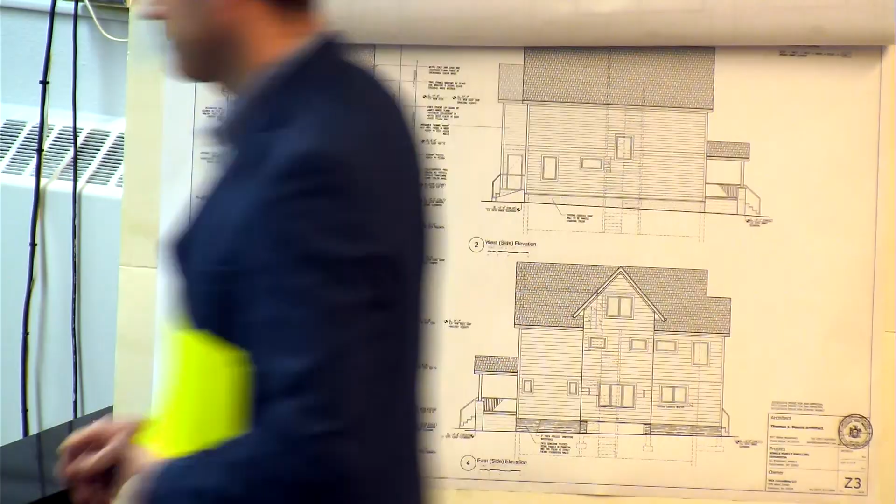I only wrote a couple materials. No, elevations we have. Yes, please. Whatever was the updated submission, which included the more detailed elevation, which specified the materials and colors, plus the materials list. It's just a little bit small on the plan you have, so if you have it for them to look at. Yeah, of course. So this is a small version of the elevations, and these are a few copies of the materials that were emailed. Materials. We also have samples if the board would like to look at specific colors or materials. Okay, let's go through that first, and then we'll look at the samples. Certainly.

As Mr. Sabaj mentioned, this is a vertical expansion of the existing single family. It is a very small building footprint. It's a corner property, so we've encountered some hardship with the front yard setbacks. So the only way to expand that building was really to go up. We proposed a small expansion in the rear as well to pick up some additional square footage, but essentially the footprint of the building remains 90% unchanged. There's an existing roofed front porch. We preserved that aesthetic of the existing dwelling with the steps leading to the front entrance.

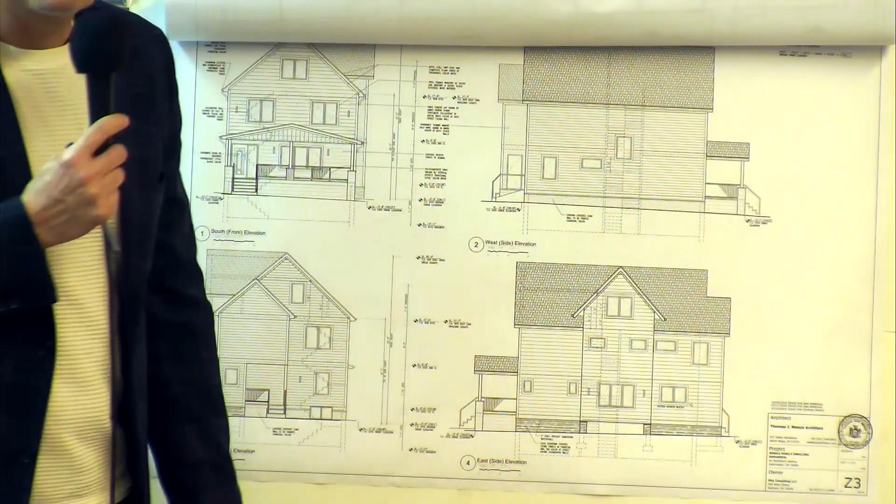That is the elevation facing Brambach. And by adding another floor, we believe that we've given the dwelling a little bit more curb appeal and also more proportional volume that's more consistent with the surrounding neighborhood. The proposed materials are composite siding, and the siding will be in a white or off-white color. The new windows will be black framed. The roof is proposed to be black asphalt shingle, and all of the trim and gutters will be white.

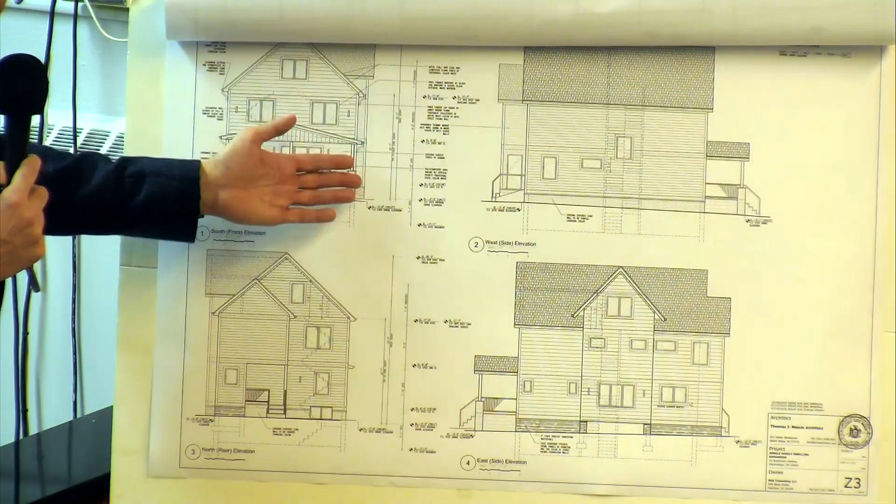There's also some of the building stone base that's exposed with visible foundation wall. So the portions of that foundation wall that are facing both streets, we intend to cover in faux stone that's going to complement the overall finishes of the facade. So are the windows now all new windows? Yes, all of the windows will be replaced and they will be black. Okay, and the existing windows are double hung, is that right? I believe there is a mixture of double hung and casement windows currently. Yes.

And right now, there's no mullions or divided lights? Yes, none of the existing windows seem to have any historic value that we would preserve. So we're proposing to replace all of the windows. Right. Plus they're also older and inefficient from an energy code perspective. Okay. Yes.

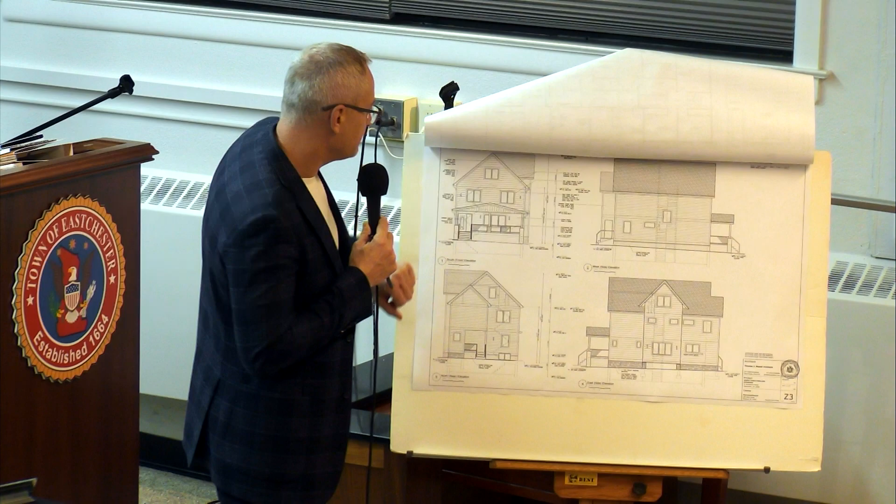Does the height of the home meet code? We are at 32 feet to the ridge from the existing average grade elevation. Which is code, exactly? Yes, code. We are non-conforming to setbacks; we already have the zoning approval for that, and the expansion up meets the code. We've applied to the zoning board of adjustments to approve the variances. But you didn't need a variance for the height of the building? We did not need a variance for height, we needed a variance for the setbacks that were pre-existing. Yes.

Is the home getting a sprinkler system? It will have to be sprinkled because the attic is habitable. And is there a streetscape drawing, or is that required at this, because it's an addition? We don't know. It's suggested for additions, but we don't require renderings for additions of this nature. Okay. Especially when they're going up. There's actually a quite elegant landscape on both sides of the house facing the streets, so we have no intent to significantly change it.

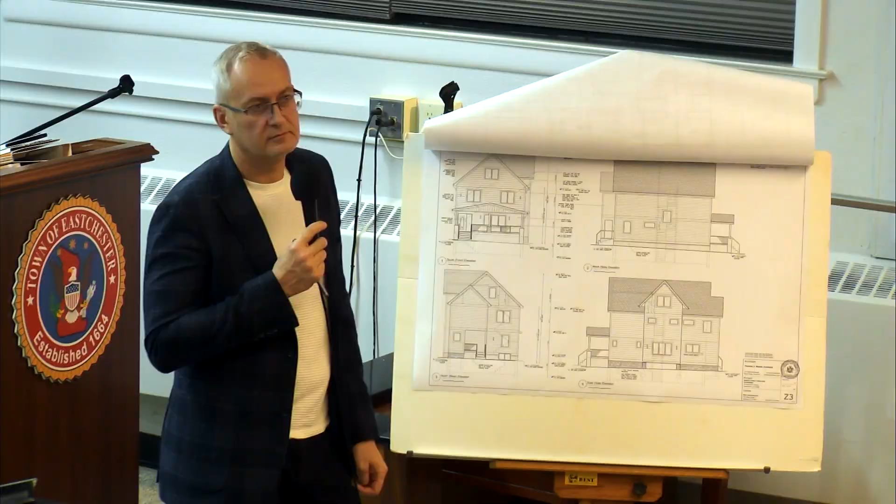What I was speaking about was what we call the streetscape, which places the home with the new dimensions in between the two existing buildings side to side, to see if it pops up or if it's in the same range as the surrounding buildings. To give it scale? Yes, most of the surrounding properties are 2.5 stories. Do you have the photographs of the surrounding properties? Maybe we could take a look at those. We did provide a set of photographs. So which numbers would be to each side?

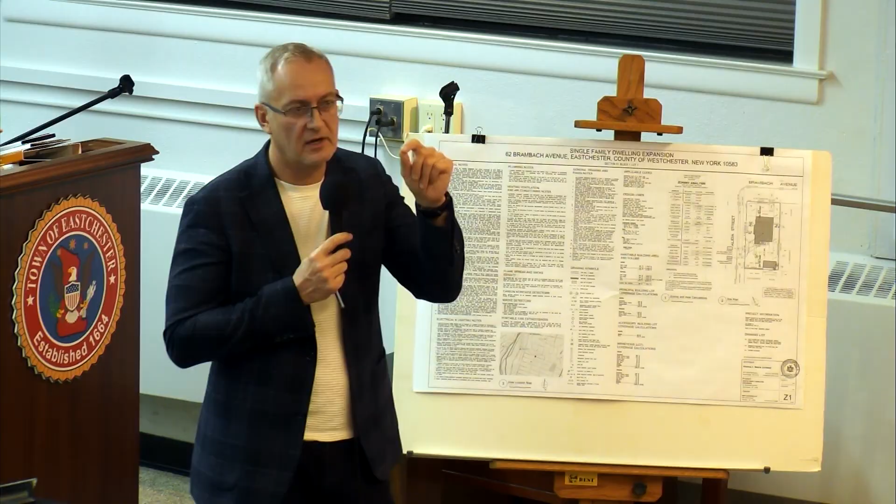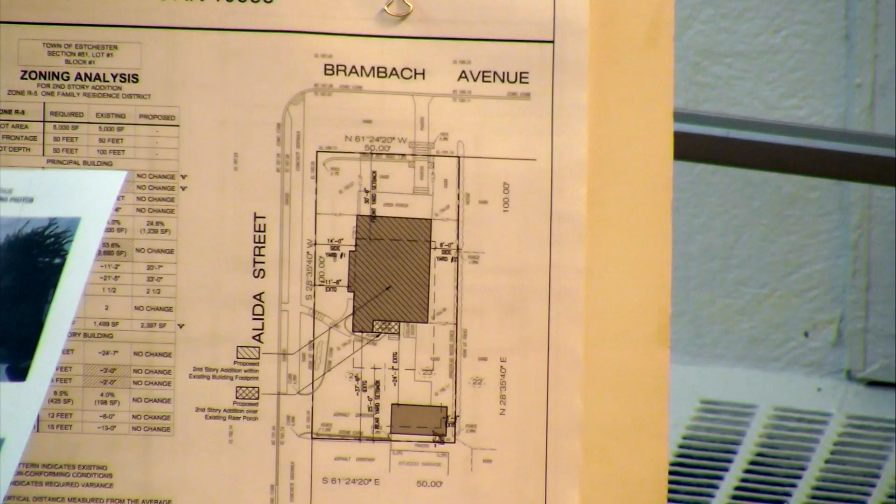They're labeled by address numbers. Yes, I think there is a key plan, the map attached, and each of the houses that we photographed is labeled according to the location plan. Do you want to maybe put them up on the board? Okay. So the immediate vicinity along Brambach Avenue, facing the house from the front, to our left are two residences. There's 66 Brambach Avenue. If you put that onto the easel, then we can project it onto the screen with the camera. Yes, certainly.

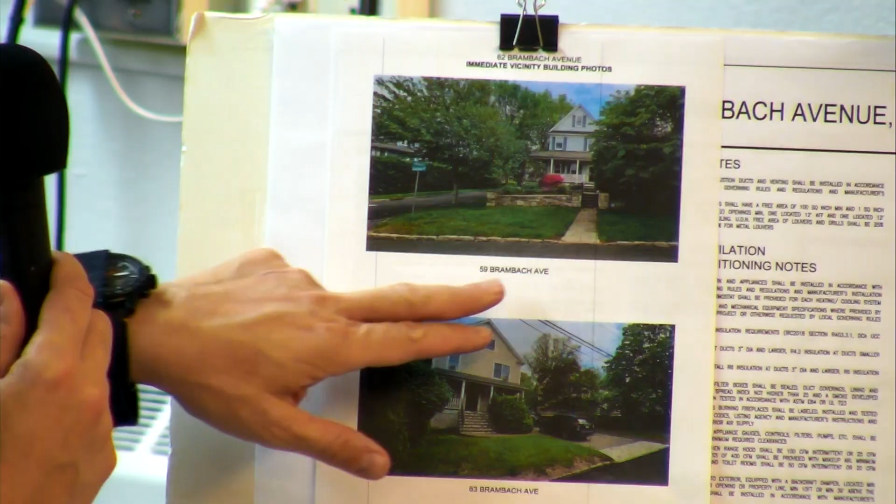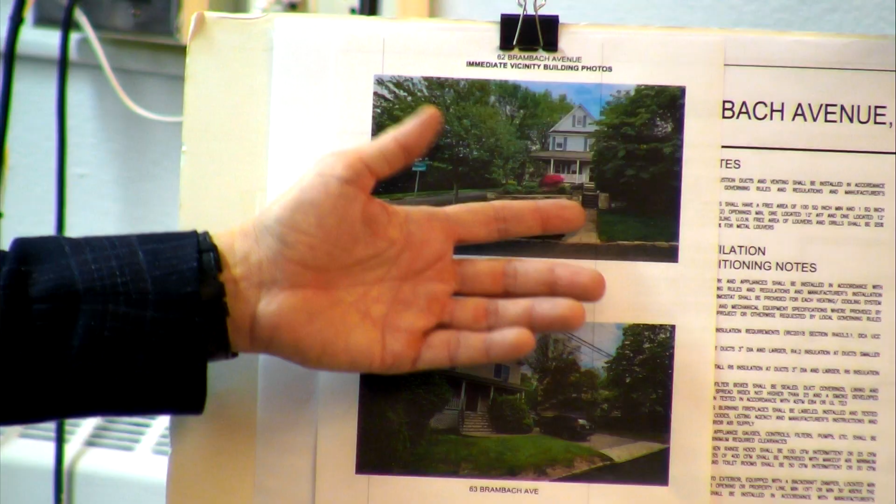Our property is here on the corner, and the two adjacent houses are 66 and 70 Brambach Avenue, and those are both 2.5-story structures. So this is the immediate vicinity. All the other buildings are either behind or across the street from us, and generally all the houses are 2 and 2.5 stories. The buildings located across the street are these two. Directly across the street on the other side of Brambach Avenue is 59. That's also a corner property. It's a 2.5-story, which is very closely matching what we're proposing: front steps, high first floor, 2 stories, and habitable attic.

Immediately adjacent to it is 63 Brambach Avenue with a very similar setup: the high first floor accessible via a set of steps, a roofed front porch, second floor, and habitable attic. So there's a strong synergy between the buildings in the immediate vicinity. Okay. 63 is the most similar in scale, right? Probably both; 59 and 63 are similar in scale. 59 is narrow, so even though it looks tall, it's not as tall. But 63 is a wider home. It has double windows in the attic, so scale-wise, it's similar to that house. Gotcha.

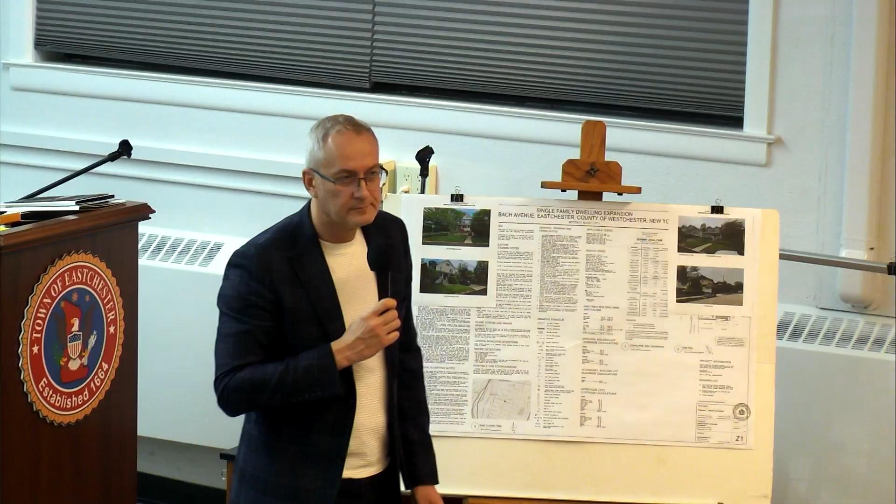And the street in general, from 70 to 66 to yours, which is 62? Does the street go flat, go down, go up? Do you know? It goes up towards Edward Street. Yes, Brambach goes up towards Edwards. And I think Alida goes slightly down towards Lee Avenue. But there are no significant differences in elevations within half of the block, I would say. So then it goes down towards Alida in front of yours? Yes, that is correct. Okay. So that kind of helps in terms of how the height appears more than anything else.

Okay. It's visibly the lowest house in the whole neighborhood, being the 1-story. Right, so I mean, now it is. At the present time. It'll be the tallest house? I think it'll be the tallest house now. No, I think it's...

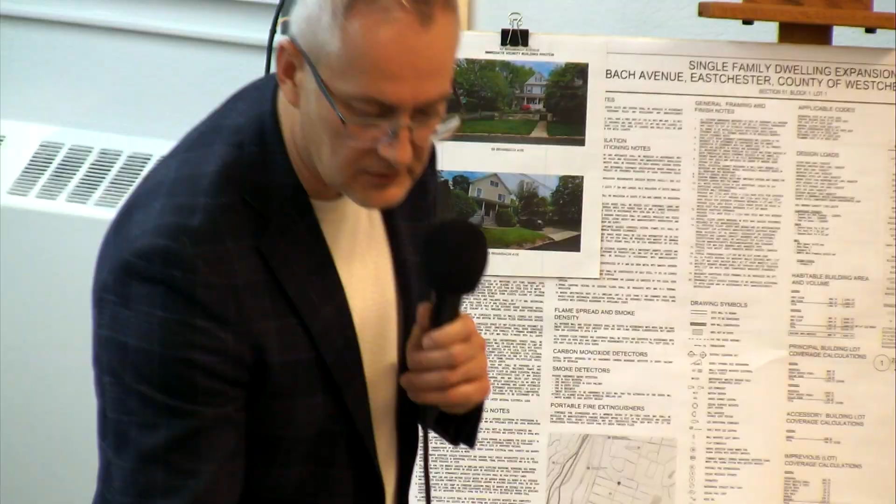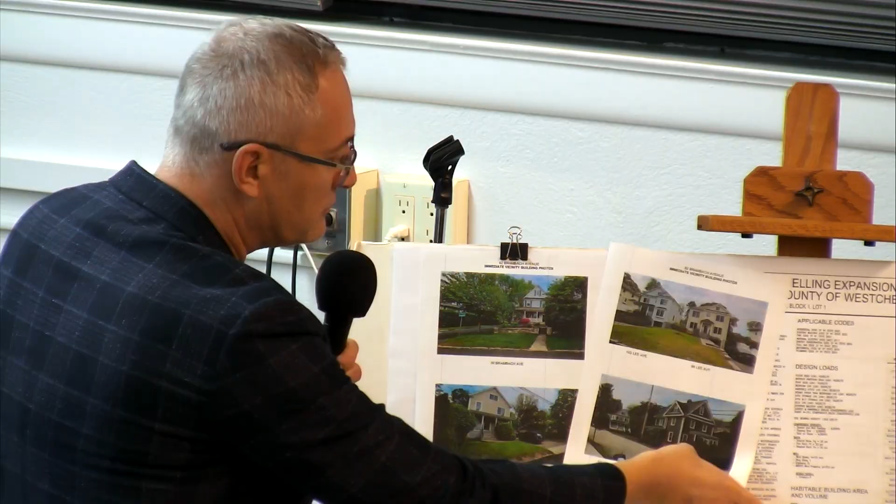So they're very similar. And then there's 2 new residences built on Lee Avenue, actually, I have it on the same page. Those are 98 and 102 Lee Avenue. They're also 2.5 stories, high first floor, habitable attic, and they also have sort of perception of a 4th lowest level, which is an exposed basement with a garage. So I think we're sort of within the middle range between the lower houses and the higher houses within the vicinity of the block.

So, on to the samples of the materials. So we're proposing a dark roof. Do you want to bring that up to the board? Yes, please. Certainly. Just pass that. Okay. Our basis of design is the black one marked in the middle of the page, by GAF Roofing.

The house exterior will be white or off-white. Here's the vinyl siding sample, the very first one in the corner. And for the composite siding, we don't have the exact color, but we have this for materiality. It's going to be in white color as well. And where will the composite be? The composite is facing the streets.

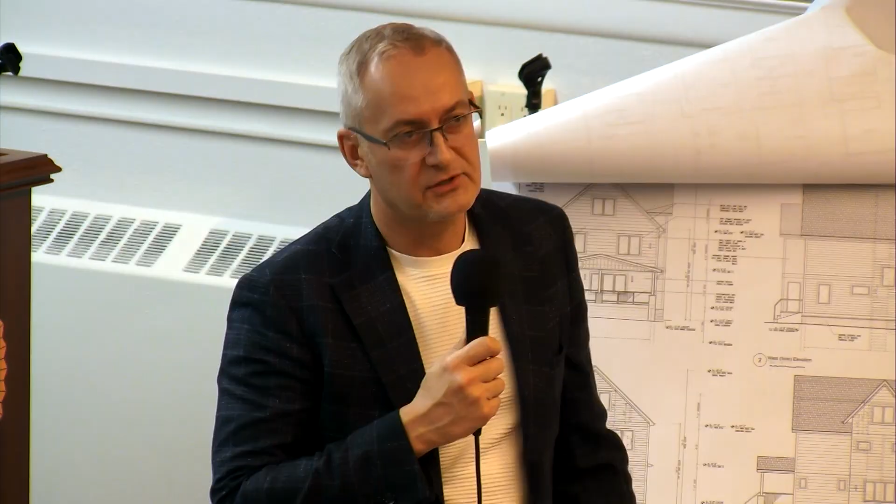So you're gonna miter the 2 different corners? There's gonna be a composite corner that's gonna separate the 2 materials. Like a PVC corner that the Hardie plank dies to, and the vinyl on the opposite side will probably have a J-bead, like a channel to accept the vinyl against the PVC. Okay. I think we're gonna use a Hardie corner at the termination of the Hardie plank, and then transition to vinyl, instead of using a vinyl corner.

Okay, so on the vinyl side, it's just gonna go up to the Hardie corner with no... Oh, there has to be a channel. So there's going to be a vertical Hardie corner, and on one side there's going to be a Hardie plank coming to it. On the other side, vinyl siding. Okay.

Do you know how much the difference would be? What's the difference between doing the whole house in Hardie and doing half and half? It costs like double. More than double, yeah. The cost of Hardie is more than double the cost of installation of vinyl siding. But being that you're doing half already, it would be more like 3/4.

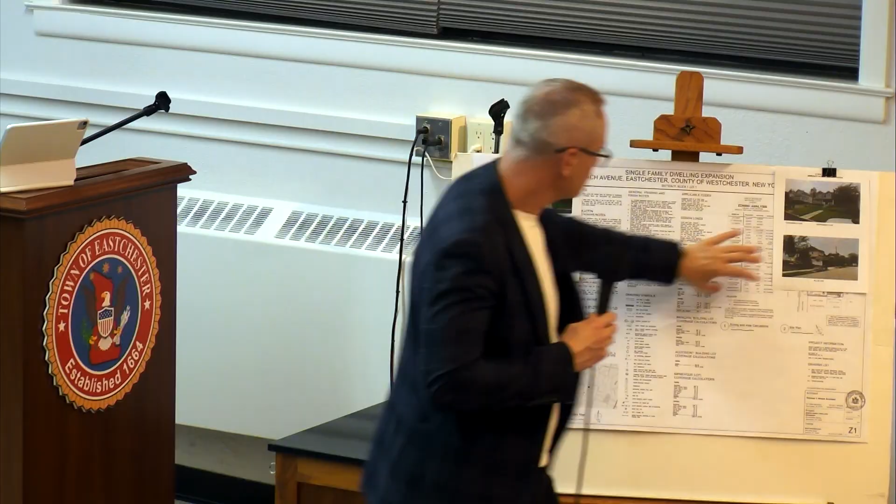I'm just afraid it's gonna be really noticeable. What do you think? That side of the house is so close to the property line that really nobody can see it. And besides the exposure, the colors are very, very similar. The color is going to be white for both materials. Yeah, cement board's Arctic white.

So the east side elevation, that also gets horizontal, everything's horizontal now. Even though that's Hardie plank, you're not doing anything in that center piece, that bump out. Facing east? That's the other corner, right? Yes, that's the one facing Alida Street. Okay. And those triple windows at the center of that elevation, are they the same windows that are in the photographs, or is that a whole new thing?

They're the same as far as the location, but there is an existing bay window which we're removing. It's inefficient, outdated, and it doesn't really serve any practical purpose. So we're coming back with a window that's co-planar with the building elevation. Not a bay window. Not a bay window, no. Is that the one that has the diamond mullions right now?

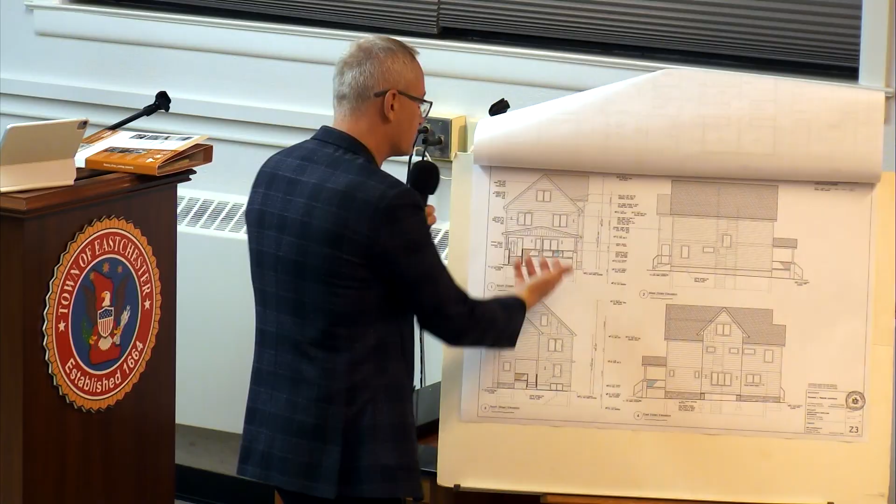And the triple window that's on the front elevation is on the porch area, that's not a bay, it's just a flat triple window, right? Yes, it's within the porch, under the roof. Yes, it's a flat window. Also co-planar with the building facade.

Do you think there could be anything like, even though they're casement windows, some sort of a division in the middle, like just 1/1? It would make it less modern in a sense, if you think about doing a divided light on the casements. They're all casements because of egress. All the new windows are casements. The windows need to meet egress requirements, driven by bedroom requirements. So consistently, we continue the same size and style of windows across the other sides.

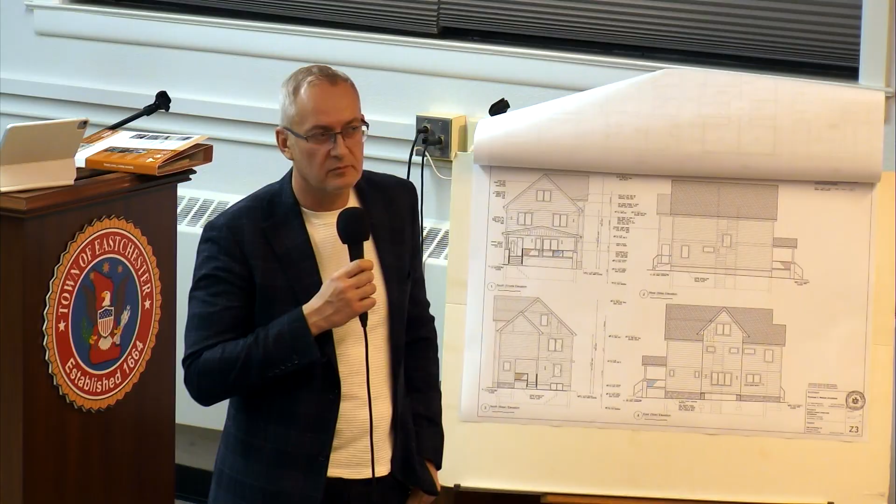Did you ever think about doing a divided light, like a fixed vertical? I mean, it's owner's choice. Most of those homes over there have windows with some divided lights. A little bit more traditional, 1920s, 30s look, right? And I don't think this home is super modern, requiring just a single pane. It certainly would be a doable thing, an option to introduce some divided lights. As long as they're all matching. It will not contradict what we're trying to achieve aesthetically.

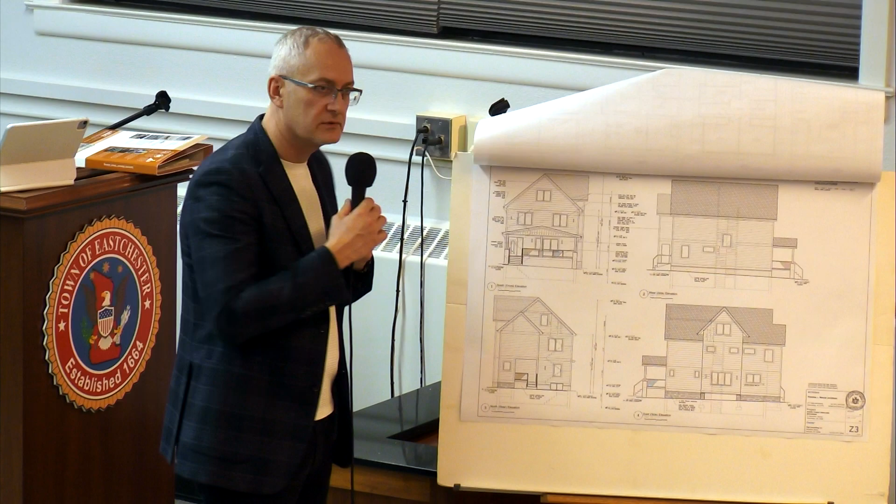Are you replacing that front porch at all, or the stairs? The front porch is staying, we're just replacing and improving all of the finishes, the siding, to the corresponding materials that we're using elsewhere. Steps are in original location, the posts as well, the railing gets replaced. There's actually a massive knee wall serving as a railing, so we're removing that knee wall, leaving just piers at the columns, and we're introducing a handrail.

Is that what you needed the variance for? No, we needed the variance for front yard setbacks for the vertical expansion. We didn't need a variance for the porch because we're not changing its size or dimensions. And the railing material? It's going to be a white polycomposite vinyl railing.

So open up to public hearing at this point.

I'd like to make a motion to open a public hearing on application 25-44, 62 Brombach Avenue. Second? All in favor? Aye. Is there anyone here from the neighborhood who would like to make a comment regarding this or have any questions about this application? No? Any more questions or comments from the board members?

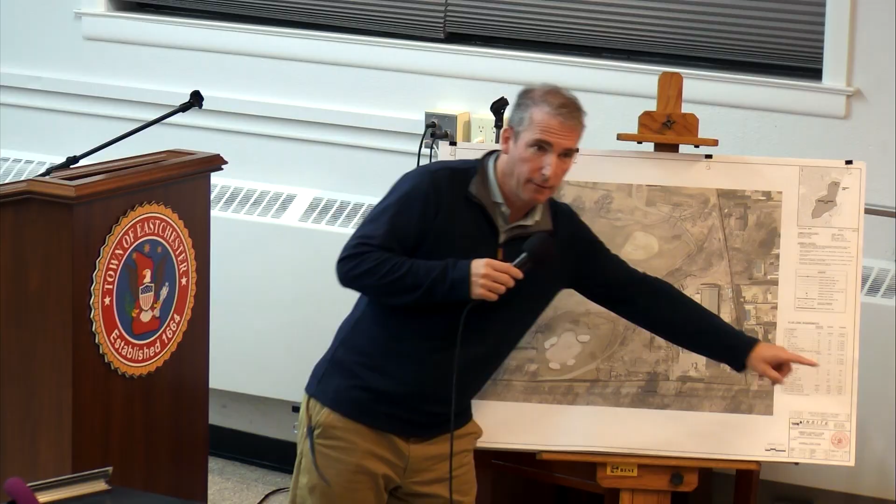There are some residences which are on the next street over. They back up to the facility. Okay, so there's nothing that's across. The facility itself is downhill from California Road and thoroughly planted out with existing material along California Road, except for where the driveway enters into the property. There's a minimal view of the buildings. There's also a minimal view of the buildings from the golf course, and there's a restricted view from the homeowners.

There's existing plantings that occur along the property line. There's some new plantings proposed along the property line. There's actually one neighbor that prefers not to have plantings because they want more light in their backyard, so they don't have plantings. It was very specific with meeting with the neighbors to make sure that everyone was happy.

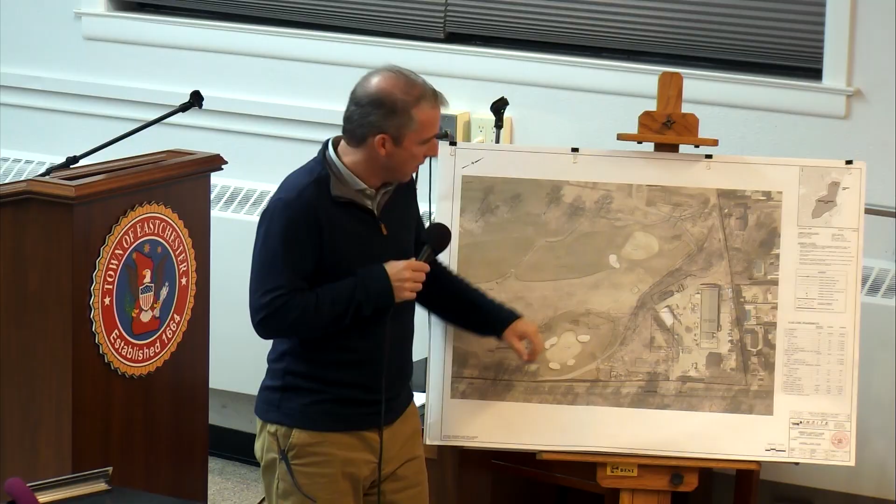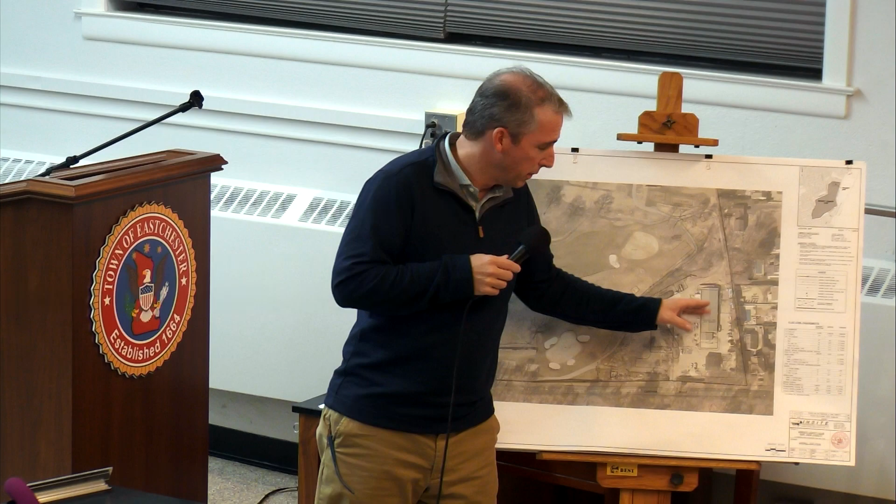So in the existing here, you see here's an existing building. This is the existing ridge that we'll talk about that has the height that we're matching with the other structures. And we're putting an addition onto this structure here. And then you'll see on the next one, there's a new structure and then one that's over here. The existing building has a metal roof and it has vertical metal siding, and it's in a green color. We're not looking to change from that.

And I can show you some images of the existing building. So this building exists, except it has a smaller, lower portion of it on the front, and we're going to extend that and then put in these two. You can see a number of additional plantings that have been added. When you drive along California Road, you can't see in. These are just supplemental plantings to add in. And there's some that's over here, and then there's a noticeable spot where there isn't some. That's a neighbor that would prefer not to have plantings in that location.

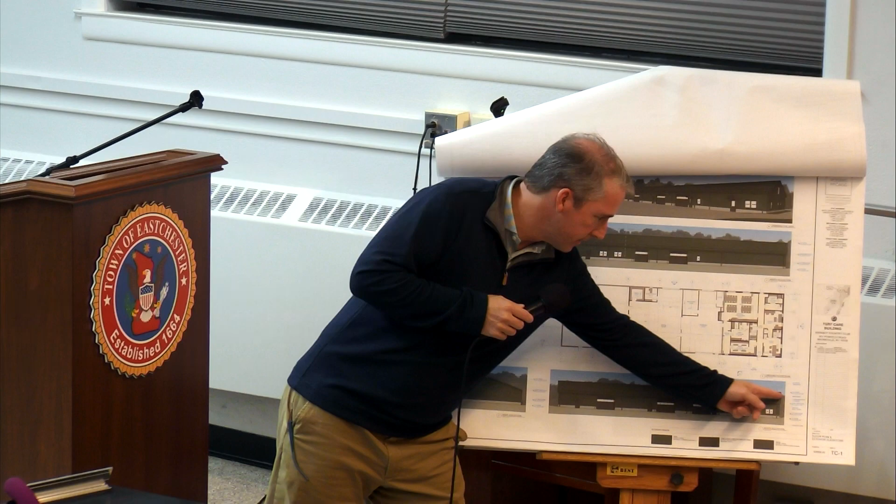The elevations that you see here, there's a white line right here. This is the existing building, and it's a green vertical metal siding with a green roof. And that is the only portion that we're looking to add. It's an addition because we're doing the full width, but there's a portion of the building that is there now. The reason for that is because we're trying to put some more bathrooms and offices for the turf care staff, so it's for the staff that maintains the golf course. Most of it is for storage of equipment, repair of equipment.

You'll see in another building that we're doing, it's an environmental center. It has a recycle wash system in it. The overhead doors and the man doors are in a medium gray. And so there's the building there. The existing has a pitched roof. No change from that. It's trying to make it look as residential as we can, although it's a commercial structure. So this is the storage barn. It has similar garage doors on it, the same vertical metal siding.

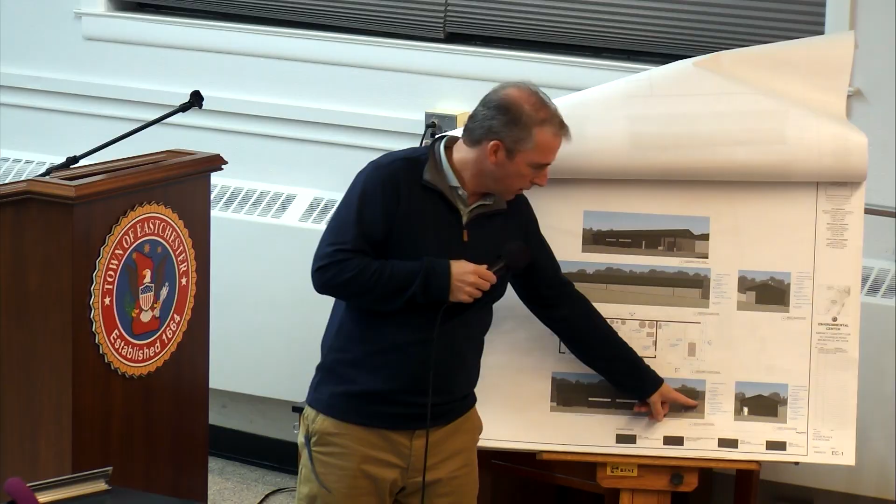This structure is a little bit different. It has a covered wash pad area. This is the one that gets a little bit more technical. This whole pad over here, you pull the tractor onto it, you hose it off, it collects all that water and clippings, and it recycles it. It's a very large pool filtration system, but it's carbon-based so that it can take the washing of the equipment as it comes off, and other stuff that's stored inside there.

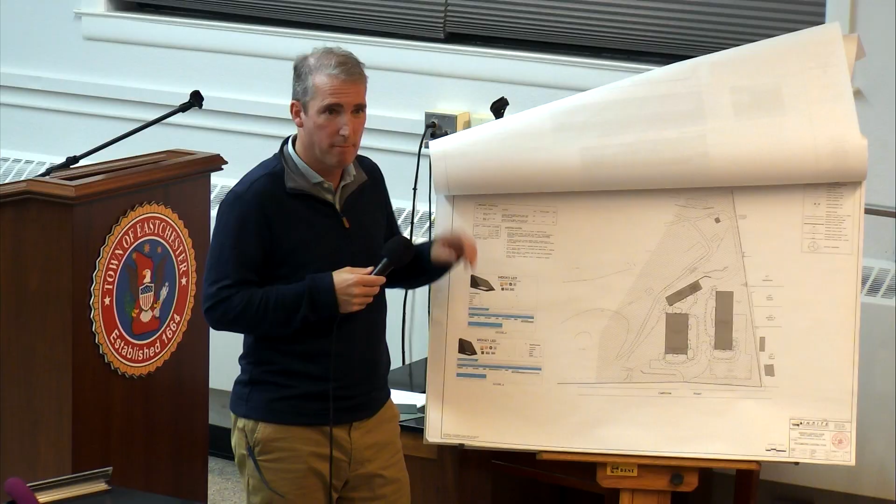You have a photometric study that's in the drawings. We have full cutoff light fixtures, and so they're dark sky compliant. There's no lights on the neighbor side of the building, except we're required to have a light at every man door. It's an emergency light. The neighbors won't see it. The focus of the lighting is in the courtyard area there, as you can see from the calculations that are done on that drawing. That's a run through.

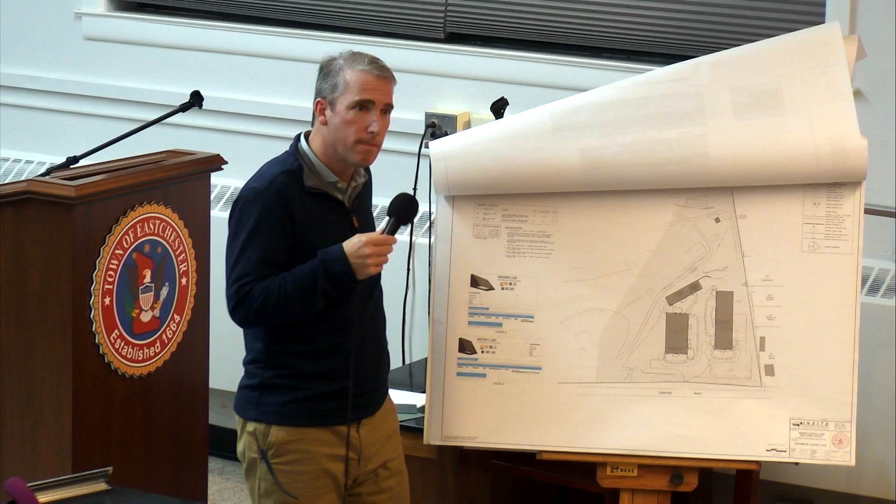Could you just, right there, one building of those three is existing and the two more are new, additional? Yes. Okay. In the presentation to the planning board, the applicant explained they're basically taking a lot of the maintenance activities they do outdoors and bringing them into these buildings. And they're all gonna match. They all match. Yep.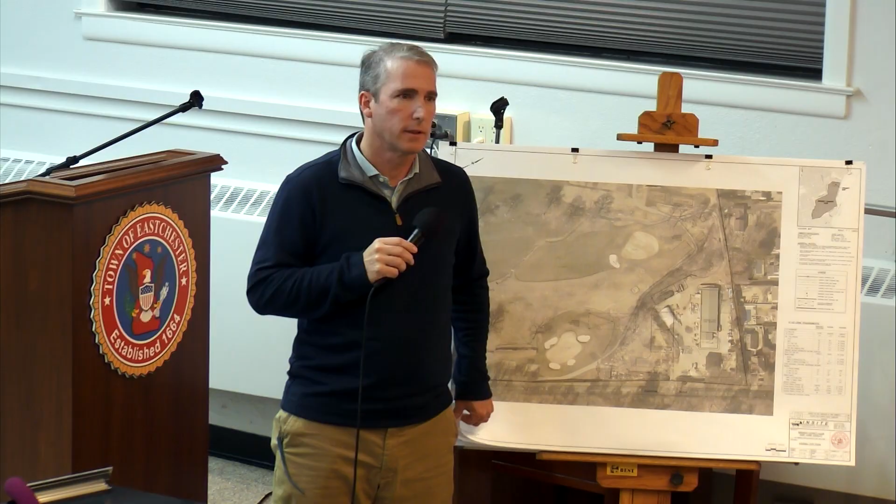And this, in the turf care building, this is all employee business: lockers, lunchrooms. Right now that area is very small. There's a toilet, and the toilet has a janitor's closet in it, and there are 26 staff in that area, so it was a little bit tight before. And a lunchroom.

That's pretty. That's nice. And

I started off just mentioning how we had to go for the variance for the height. It's only 20 feet tall. It's just that it's different rules than the residential, but it's 20 feet. They granted you the variances? Yes. We just have to go back to planning board to complete the process. But planning board really had no comments for us.

They were very favorable. What was the highest? The height, yeah. 20 feet was the highest, okay. It's a one-story building. No, it mentioned it's 26 feet, pitched, that was proposed. Would we want to have a flat roof to have it be lower? No, I agree. The 26 feet is the ridge of the storage barn. The storage barn to the eave is 14.5 feet.

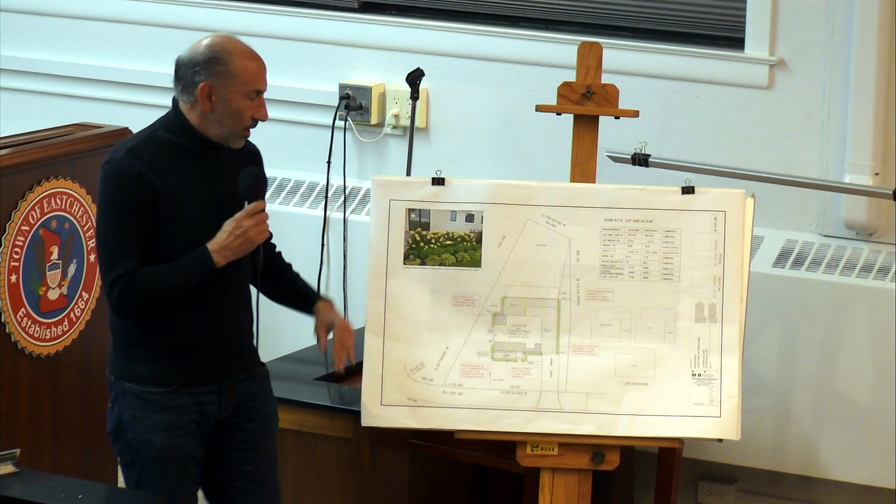And the zoning board granted several variances, including a side yard setback, the proposed longer front porch than is permitted, and a side yard setback as well for the second-story addition. Currently, it's a 1.5-story home. The intent is to have a full squared-off two-story home. The existing first floor will remain. It's 8-foot ceiling heights. That will remain, and then the second floor will be developed in full.

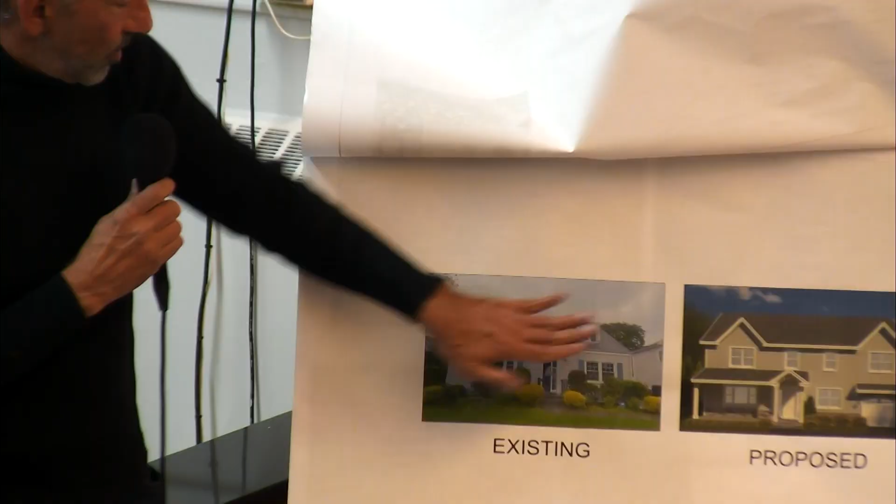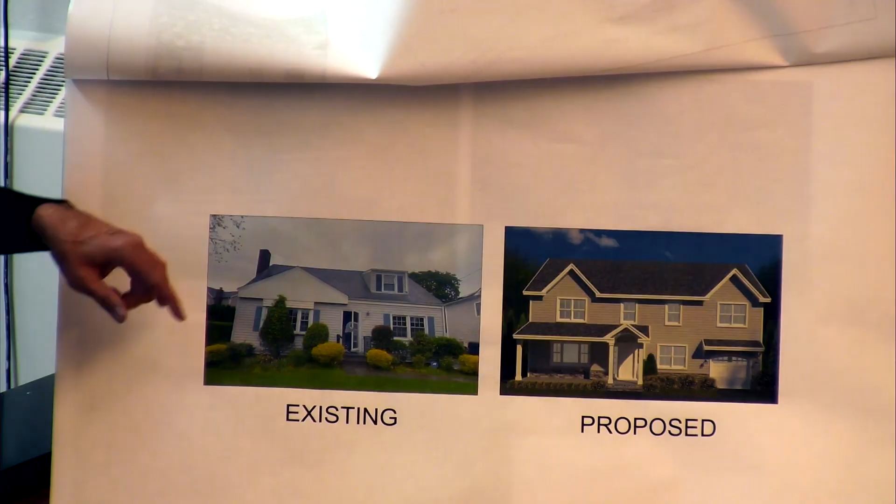You can see the existing home here compared to the proposed rendering. So the second floor will come off. All the windows will be changed, all the siding will be changed, new roof shingles. All the windows will be 2/2, simulated divided light, white grille. The siding is a Hardie shake-style siding with a 5-inch exposure. You can see here the proposed front porch and the front door. The garage currently is kind of around the corner, set back. We're pushing that forward so the garage aligns with the front facade.

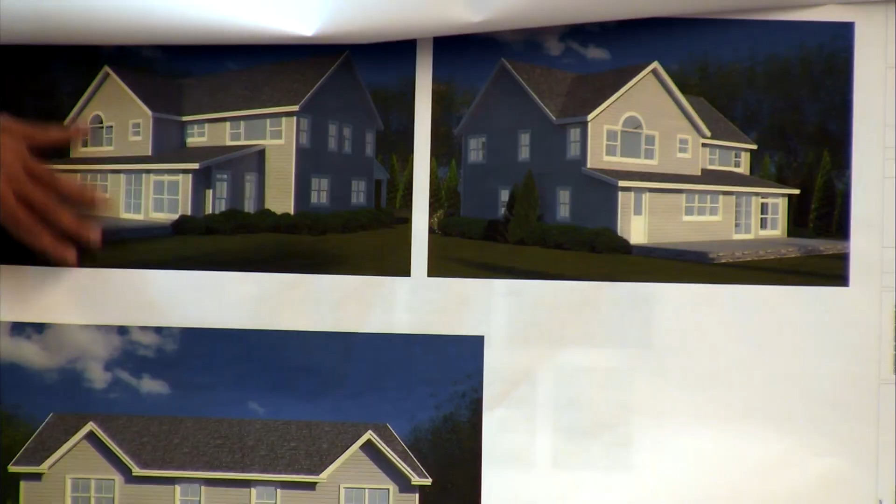You can see here some views from the rear and the sides, and the asphalt shingles for the roof, and all the siding; all the trim work will be an AZEK white board. We've also added 2 lantern-style sconce fixtures at the garage door. Let me just...

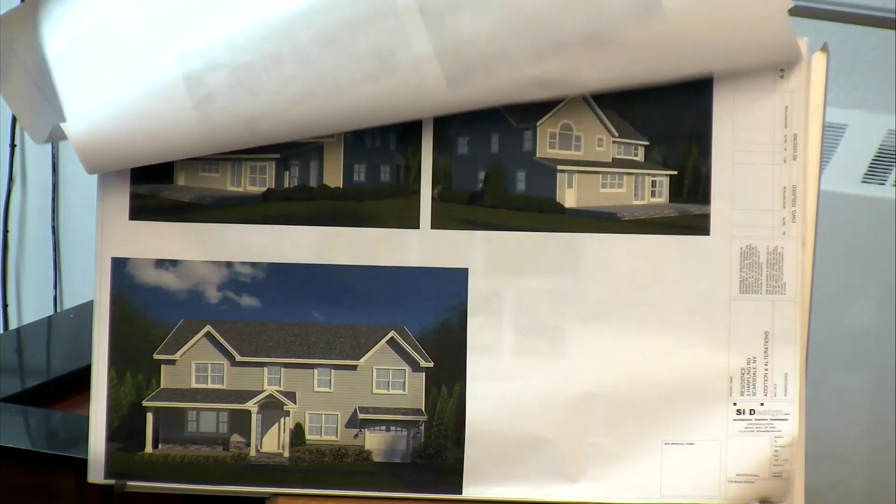These are photos of the existing home. You can see there's a shed dormer in the back, a low attic, a small dormer in the front. The whole entire roof will come off. These are some neighboring homes. Hanfling is relatively flat, and all the homes here are all 2 stories.

I believe the home number 5 did a recent project years ago. They're actually taller. One of the things we clarified was the height. We are 17'11" or 18 feet to the principal eave, which is below the maximum requirement.

And here is our color and material board. You can see here the windows, the roof shingles, the siding, and we're doing a stone skirt in the front of the house. And then we have the 6x6 columns, which will be wrapped with the AZEK trim, AZEK board, and then the sconce fixture, which will be by the garage door.

Okay. A moment ago, you mentioned the height being 17 something? Just to the principal eave, that was one of the clarifications that we had to put on the elevation drawing. Yeah, we have 2 height measurements, the first to the principal eave, and then to the ridge, which is permitted 33 feet. Right, and this is 29'10" to the ridge, I believe. Yeah. It's less than 18 feet to the principal eave.

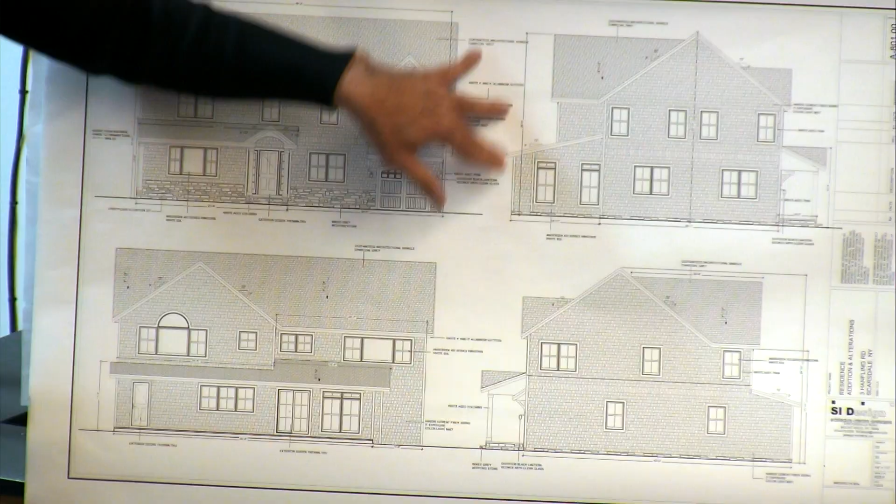And then previously, you mentioned that the first floor will stay at 8 feet, and then the second floor is also 8? Yes. Oh, okay. Did they mark the materials? Not on the elevations that you have, but we did receive updated elevations. Okay. Yeah, the only thing we added was that dimension to show that it's zoning compliant in terms of height. Right, and an indication of the materials. Yeah, that was all the indication of the materials, yes.

And do you have samples of the material? Well, you had a picture there that I don't think we have. You might have that on a separate sheet in the application packet. That was what initially was submitted. These are better than the actual samples, just in terms of... Oh, okay, here we go. Yeah. Thank you.

And the mixed gray Bedford stone appears on the front? The stone is only on the front, and the gray mist siding is the entire house. What's the material for the siding? It's a cement fiber board, a Hardie, but it's like a shake style, yeah.

Did you ever think about, I think the front elevation reads too flat, one-dimensional. Did you ever think about the two gables you have in the front? If you project those, the second floor elevation just slightly out, where the gables are. You mean like cantilever it forward? Yeah, just like under the gables, where the two windows are, like this. Oh, like that. And also, if you ever considered doing a hip roof. We did not consider doing a hip roof. The owner, the client, liked the gables the way they are in the front.

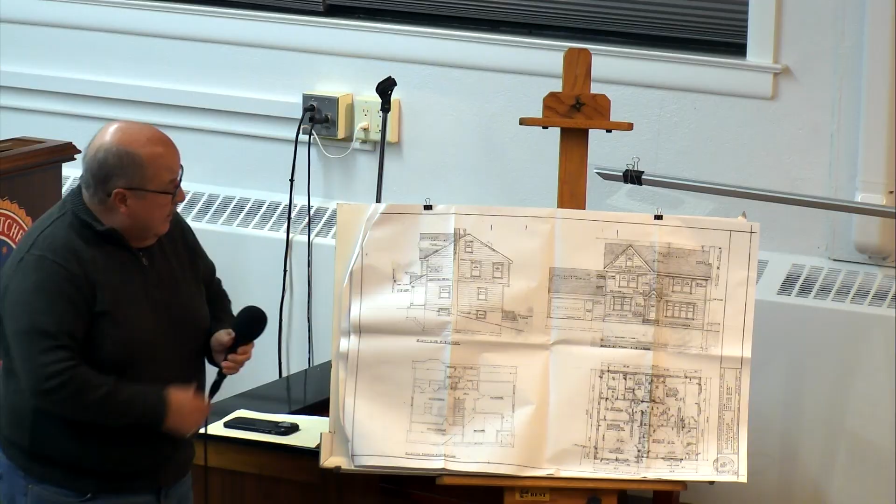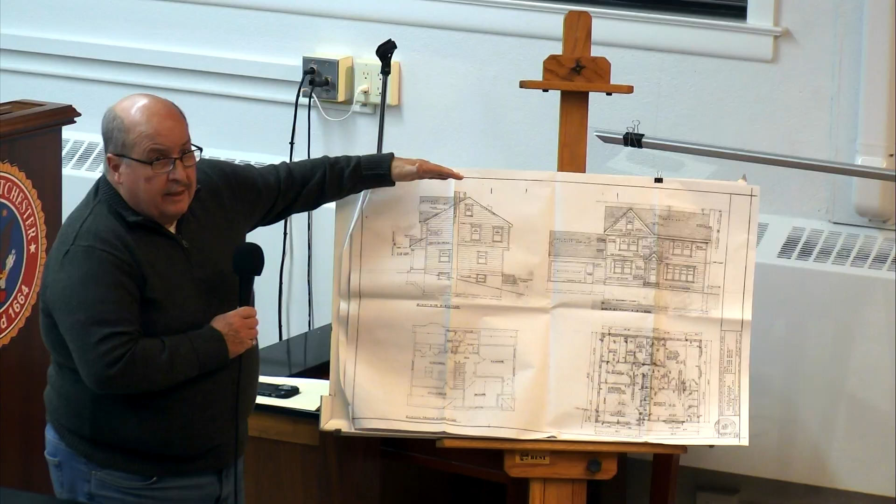Good evening. My name's John Caro. I'm representing Mr. Hanna tonight. Just hold it closer to your mouth. Apologize. So we're basically going to be expanding the house vertically. Right now, it's a gable roof over the existing house. And there's a small dormer on the front of the building, which has a room, if you will, in it. It doesn't really have adequate ceiling height, which is one of the reasons that they've decided to expand the building vertically.

So we're going to have basically 4 bedrooms, 3 bedrooms upstairs, and 2 baths. The building will be about 17 feet to the eaves and another 8 feet to the top of the roof. We have to also extend the chimney vertically. We're adding a new covered porch on the front of the house. The windows on the bottom of the house are going to remain, and there are no muntin bars in the windows. And we're going to continue that look in the top, so we're going to keep all double hungs

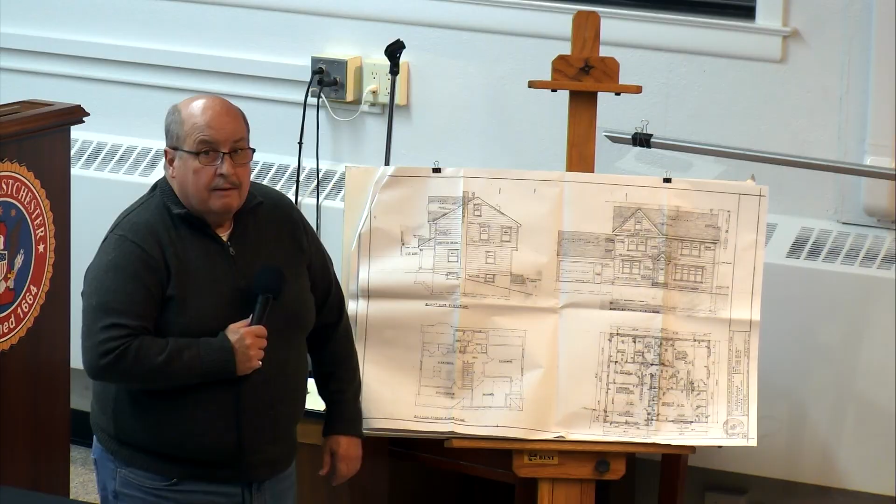with no muntin bars. The building will probably be all resided with Hardie board. All the trim will be AZEK. They haven't picked a color for the siding yet, but the siding and the roofing will probably be a dark color, but I don't know what it will be yet. Do you have a palette that you're considering that maybe we could discuss? Yes. Some samples?

Yeah, we just have samples of some sidings that might be used on the house. It's not really a palette picked yet, except for these colors. Would you like to see them? Yes, please. So are you using Hardie board? Yeah, it's going to be all Hardie board siding on the outside. It'll be a clapboard style siding. All the exterior trim's gonna be what? AZEK, white? White.

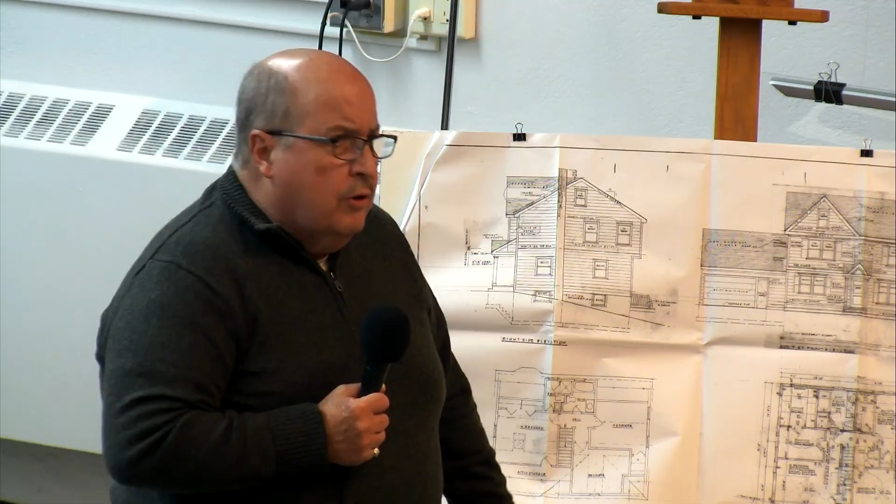What about the roof? Roof will probably be... The Hardie plank, are you gonna go textured or smooth? I'm sorry? Textured or smooth with the Hardie plank? Texture. Textured?

And what about the windows? Are they all new windows? The windows on the lower part of the house are all going to remain. We're going to basically match those windows. Those windows were recently replaced, and the new windows on the top of the building will be similar windows. What type of windows are existing? Vinyl replacements? Andersen? Oh, Andersen's? Yeah. Everything will be... and the existing window colors.

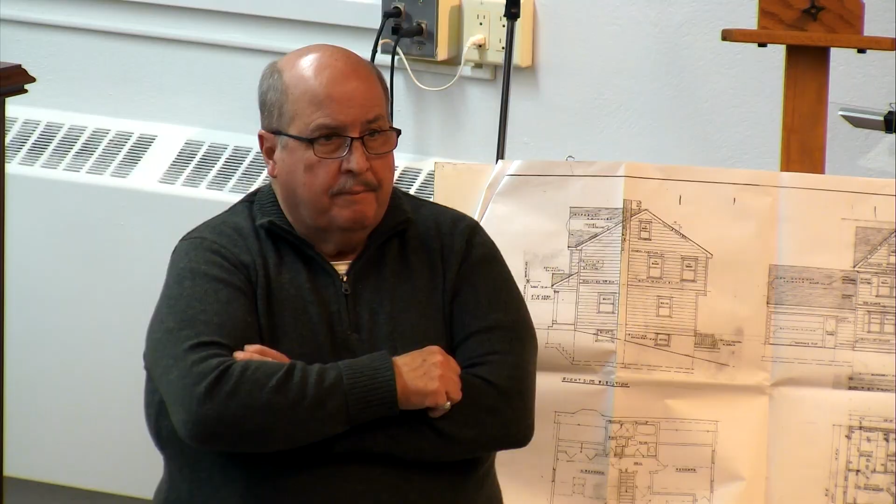And then can you pass me down the samples? I could write down the colors, the ones you would like to recommend. Okay. So we prefer the top two. Top 2, okay. Generally, we prefer the lighter since you're going dark with the roof. Okay, but present the roof color when you come in. And then the window color is white? Is that what's existing? Okay. And the trim will be white as well? Okay, so just present that in a package to the planning board when you beef it up.

Okay? So why don't I read through the recommendations to the planning board? Okay. And then we could proceed with a motion. So it would be, the applicant is proposing white Andersen 400 series windows. Please provide a cut sheet for the windows with the planning board submission. Please specify the color of the siding. The Architectural Review Board recommends a lighter color siding such as the aged pewter or Boothbay blue. Number 3, please update the drawings, oh, no, sorry, that's the same.

Please show the location of new HVAC equipment on the site plan. Please indicate that the chimney will be extended using the same materials as existing. And please label the white AZEK trim on the elevation. Also shutters, color of shutters. They were proposing shutters, but we don't know the color. Okay. I mean, when they present, right? Because they were gonna do. Sure. Make sure that that's. Sure. So 7 would be to add the color of the proposed shutters to the elevation.

So I'd like to make a motion to refer application 25-53 located at 4 End Place to the planning board with those previously mentioned recommendations. I second. All in favor? Aye. Aye. Very good. Thank you. And our next application this evening is application 25-71 located at 10 Sage Place.

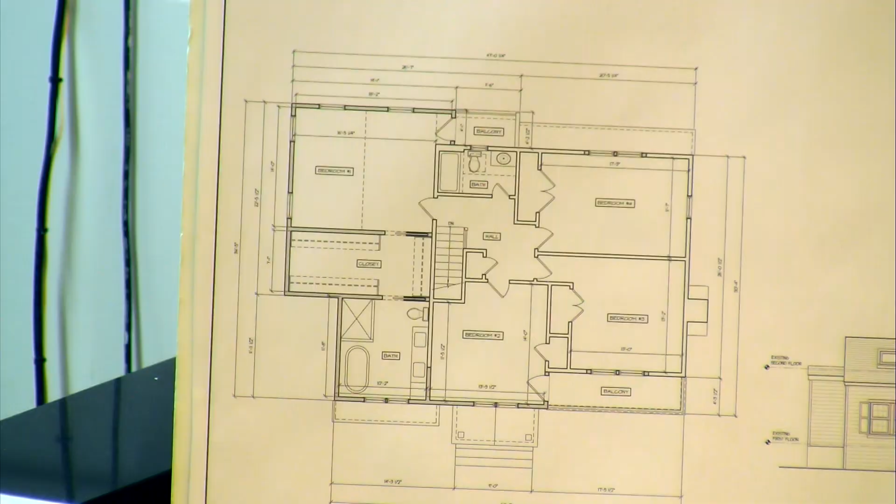And then here is the proposed front, showing the second-story addition, the two-story addition further back, one-story addition at the front with a balcony, which is accessible from the second floor, and the new portico. And then on the sides, this side of the house, really, you only see the addition beyond.

And then this is the rear, the two-story addition here, which is currently a one-story addition that we're just adding onto the second floor. And same thing on the side. The side is existing at one story, we're just adding the second story there also.

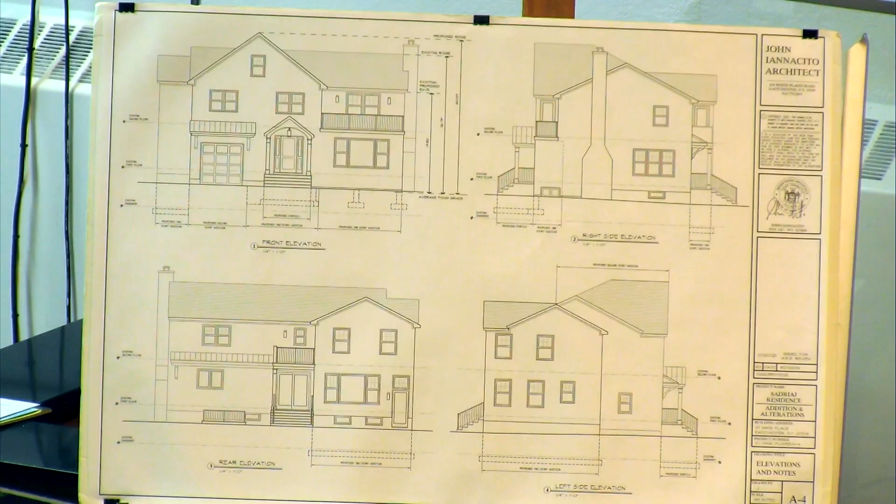The windows will be Andersen 400 series, vinyl clad in a black finish. The trim boards around the windows will be AZEK with the black finish. The trim boards at the roof line, including the eave, the soffit, and the rake boards, will all be AZEK in a black finish. The trim at the portico, including the rake and the columns, will all be AZEK in a white finish. The trim at the roof structure over the garage doors will also be AZEK in a white finish.

The railing at the balcony, we have a balcony here and one at the rear, is going to be a metal railing in a black finish. The front entrance door and the overhead door will be a fiberglass door with black finish also. And then we're proposing a couple of light fixtures. We have one at the portico here, a hanging fixture, and two fixtures at the upper balcony on either side of that window.

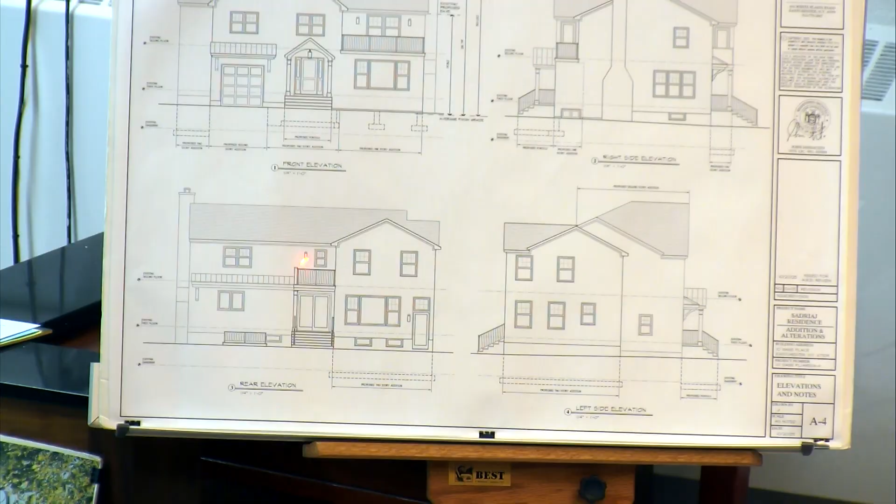And then we also have a couple at the rear, one at this entrance here, and one at the upper balcony above the rear entrance. And then we also have some recessed lighting underneath this roof here. Thank you for your time, and I'm happy to answer any questions.

The base color is white, is it white? The stucco's white, yeah, there might be a little bit of shade in it. Winter white? Yeah, kind of. There's a lot of variations on white these days. Used to be one white, now there's 600 whites. And the texture to it, is that? Yeah, the texture of the stucco.

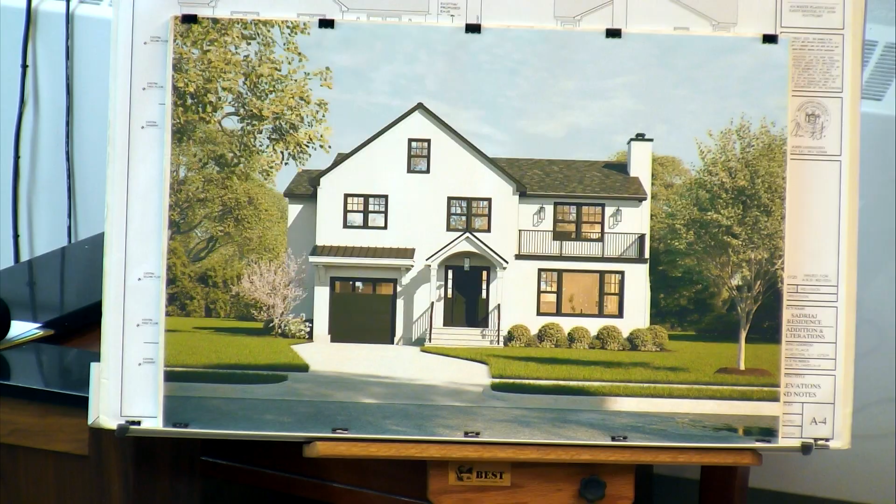This is a gray finish, but this is the stucco. Okay. And then the roof shingles is charcoal. Okay. This is the overhead doors. There's the metal railing. AZEK. And the standing seam metal roof. So basically black and white everywhere.

The AZEK's textured? Oh, no, it'll be smooth. Yeah, smooth. The black AZEK, are they gonna paint it? You know, you can paint it. Sorry, would you mind using the microphone? Thanks. You can paint the AZEK, but there is a material that comes solid black, so we'll probably go with that one. I think it's called Boral.

You said they're doing stucco all the way around? Stucco all around, yep, including the chimney. The chimney's currently brick, so we'll stucco the chimney. What is the siding now? It's vinyl. Okay.

So, I'm not finding the exact garage door here, like the windows, is it? Well, that's the company, so I think there's one that might have more divided squares on it than what's shown there. Okay, well, most of them in a single garage have like two transoms, and this one has three. Yeah, we're gonna do the one with three. They'll do it? I think so.

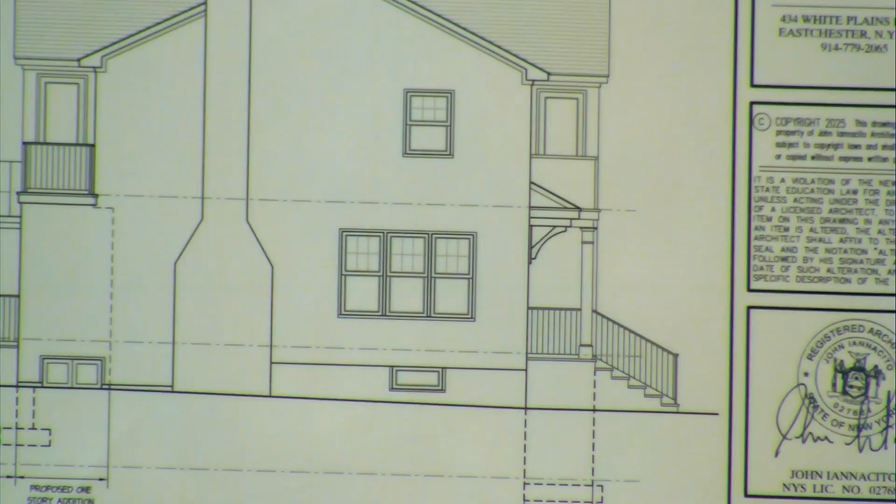And then, I know that it's the planning board's purview regarding the HVAC, but are you upgrading? Are you still keeping it in the same place? Yeah, so currently it's in the corner here behind the chimney. And there's also some pool equipment here. So yeah, we're gonna keep it in the same location.

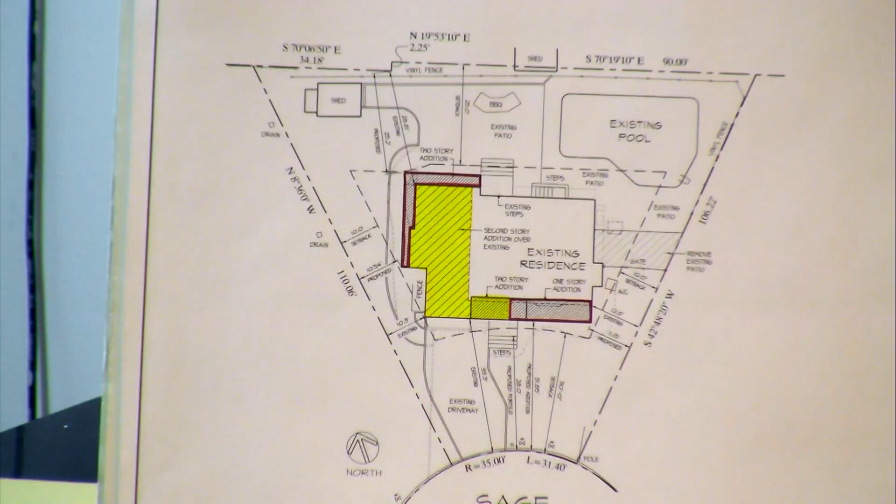They probably will replace it. I think they wanna go into a heat pump system instead of the conventional AC, but it'll still require a unit outside. Okay, so just make sure that it's on the site plan. Yep. Any other comments or questions?

Okay. I'd like to make a motion to open the public hearing for application 25-71 at 10 Sage Place. I second. All in favor? Aye. Anyone here from the audience like to question or comment regarding this application? I guess not. I'd like to make a motion to close the public hearing on application 25-71 at 10 Sage Place. I second. All in favor? Aye.

And then I'd like to make a motion to refer application 25-71, located at 10 Sage Place, to the planning board with a recommendation to approve as submitted. Second? All righty, all in favor? Aye. Thank you very much. Thank you.

And as always, appreciated those nice renderings, John. Okay. You got the rail? The railing is good. Thank you. Have a great holiday. You too. Thank you, you too.

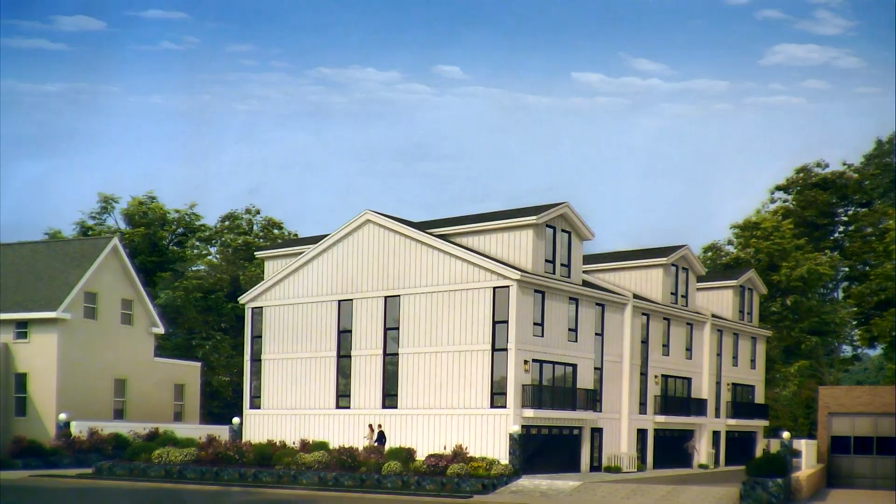We were referred to your board by the planning board at their last meeting. And with that, I think I provided a brief overview of the project and where we stand in the process, and I'm going to turn it over to Mr. Agavino and Mr. Freda to go through some of the specific design concepts that they're proposing for your consideration.

How you doing? My name is Angelo Agavino. I'm the owner of the project, hopefully the developer. Thank you for taking the time out to take a look at the drawings this evening. What we're proposing here is a 6-family, 3-bedroom unit.

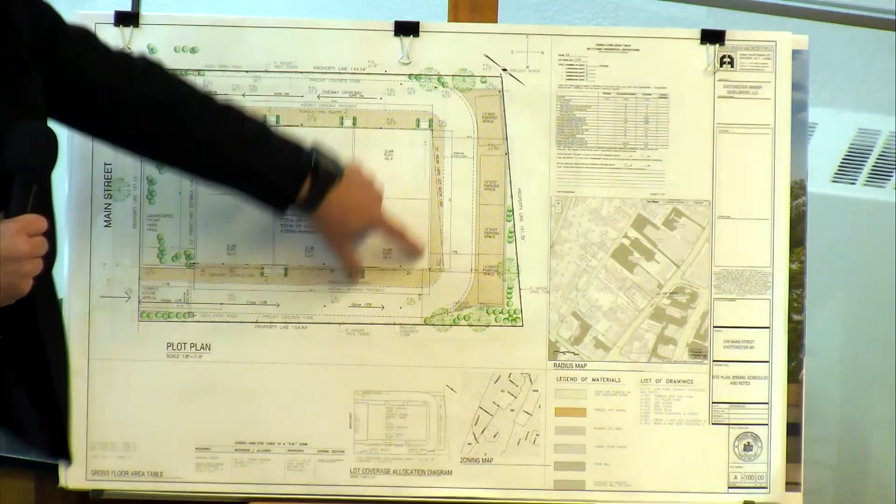We did a flow-through driveway that starts on the north side, goes around the building, and comes out on the south side. We have a mix between blacktop and pavers. You'll see the hatch; these are pavers. Here's the air conditioning units by the front of each of the dwelling units. This one has 2 next to each other.

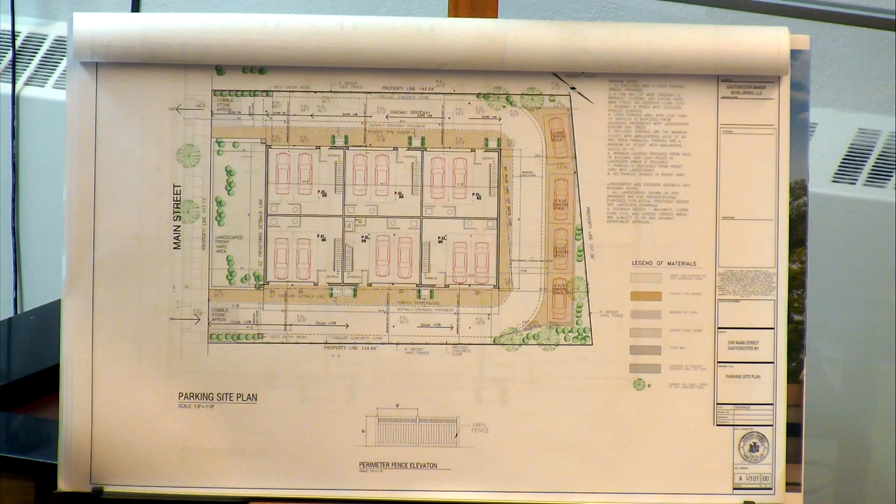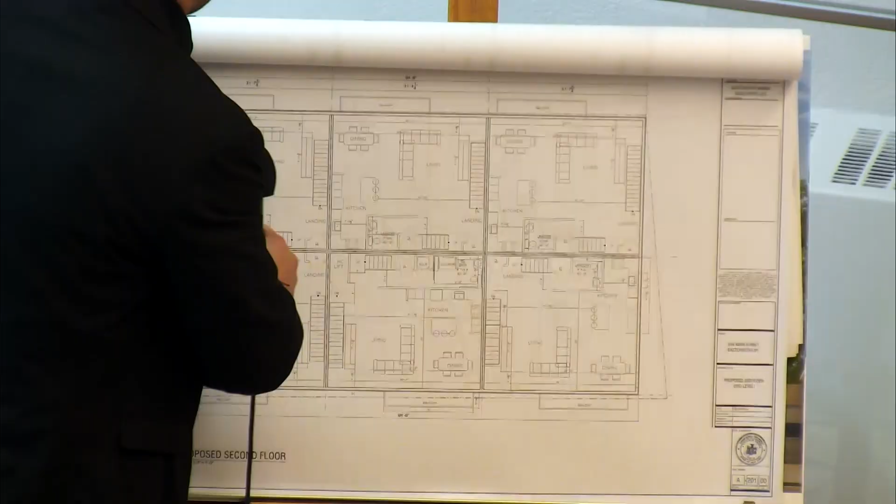Each apartment has two indoor parking spots on the first floor and basement area. And then we have some additional parking here in the back. We designed basically an open floor plan. So the first floor coming up into the kitchen, living room, family room, dining area is all open. Then we have 3 bedrooms upstairs. There's a master bathroom and then a shared bathroom in the hallway.

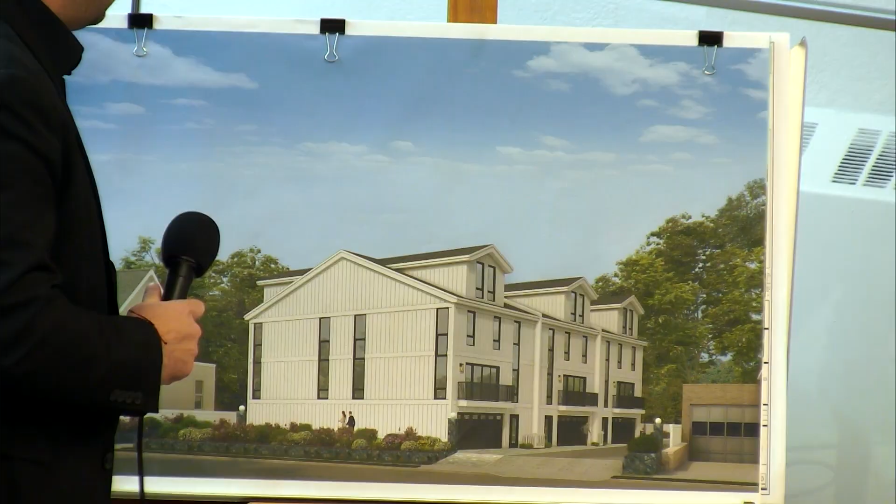We're going to do the board and batten style from Hardie. The sheets come 12 by 4, and it's all cement board, and the batten pieces are also cement; they come every 2 feet. So the sheet goes up first, and then these battens go up to get the three-dimensional farmhouse look. The trim is going to be AZEK, and it's going to be white.

The windows are going to be 400 series Andersen windows, black. We're going to go with a black garage door and black front door. Each apartment has a small balcony and a Juliet balcony to come out with double sliding doors. They open left to right, one's left, one's right. I don't know if the board has any questions that I could help answer.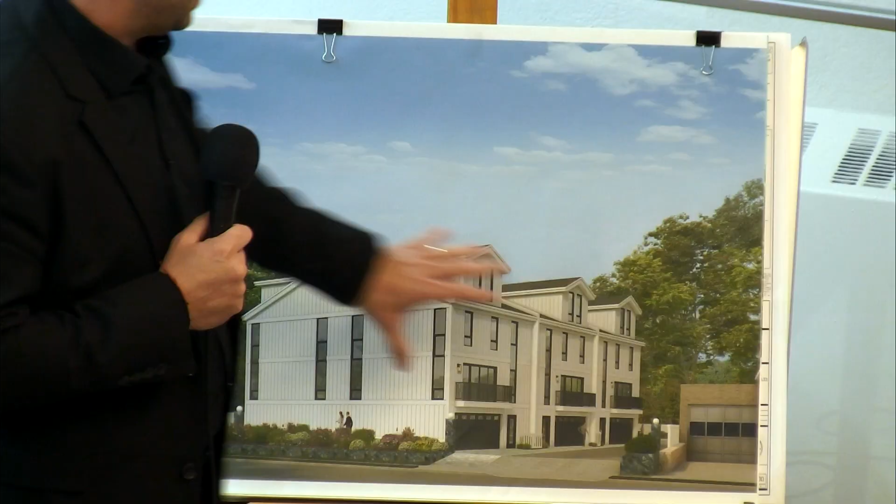The garage that I see to the right of that, is that part of the firehouse? No, this is the firehouse here. This is the three-dimensional shot, because I wanted to get more of the angle; this is part of the firehouse. Okay, so I'm not seeing it in this picture, it's probably over there on that picture? Yeah, it's actually to the left of that, the white door. I guess it cut off in that.

All right, and then 243 Main Street, the yellow home, is that the one to the other side? They actually just painted it maybe a few days ago. It was yellow, now it's blue. But that's the house, yeah. Okay. I think you do have a streetscape? Yeah, I do, if you wanted to see that.

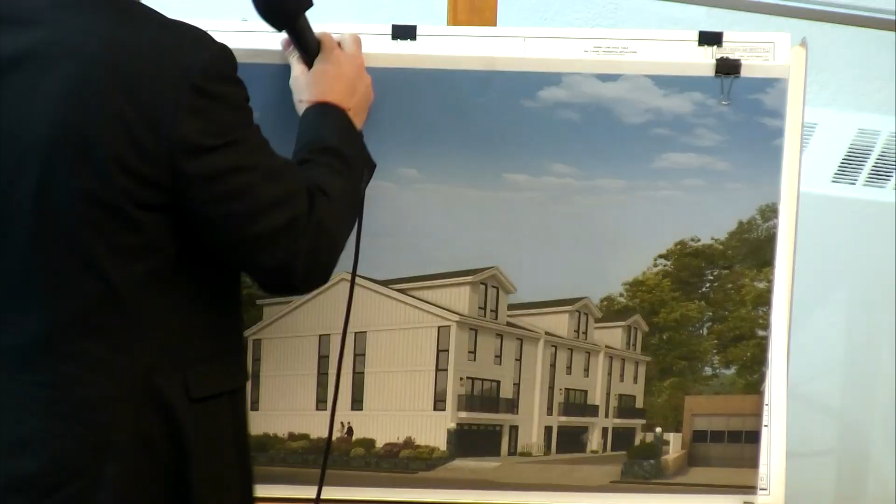First page. Okay, so this is the house to the left that you see in the photo that's yellow. This is the proposed building, and this is the firehouse. So the top of the garage is right here, and it slopes down. What's the height of the ridge?

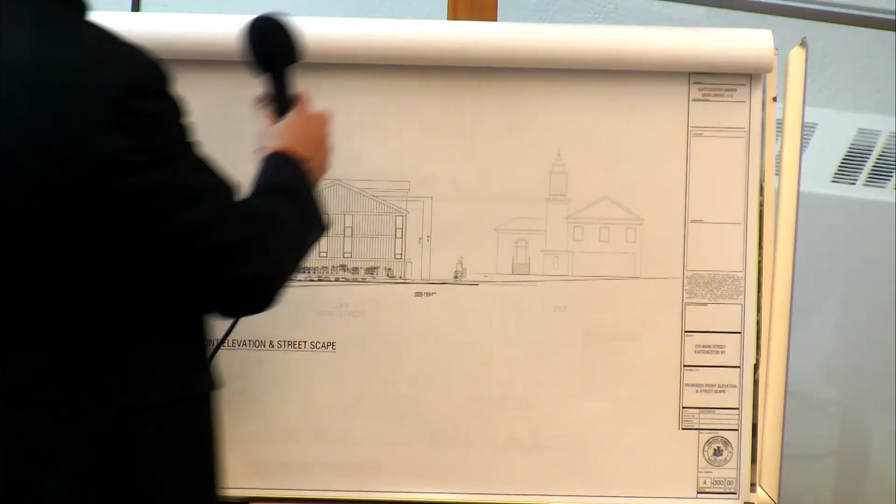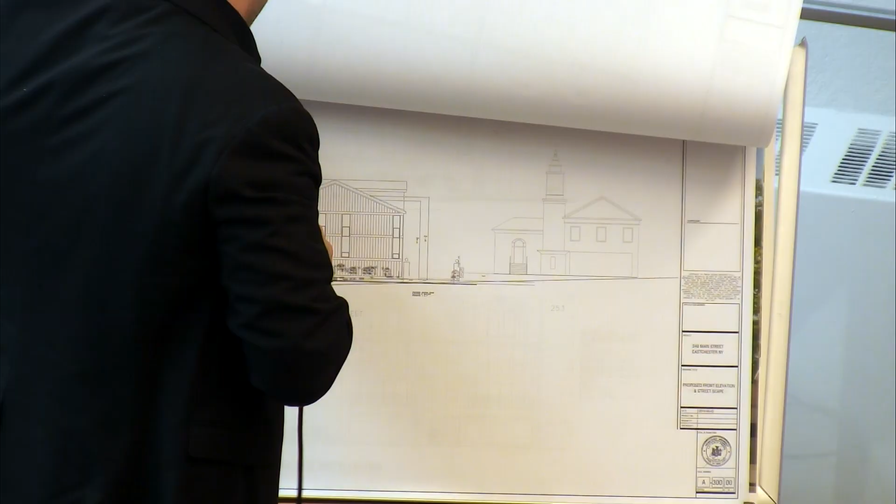I think it may have been on that paper, on the first page, the streetscape drawing. 39 feet, 1 3/4. Would that require a variance? No, because this is the RB district. Okay.

The dormers on the roof, is that just clerestory for the second floor, or is it actually storage? There's storage and office space in the attic; it's a walk-up. Oh, so it's a little occupied space. This wasn't approved by the planning board yet, right? It's still pending before the planning board, yeah. So the staircase is going to the third level, I guess? Yeah, this is the staircase going up, walk up. And I guess they have to be sprinklered, right? Sprinklers, yes.

I really like the side view better than what's facing the street. Yeah, it looks a little more commercial, as opposed to residential. Yeah. Do you have the materials? I do. Sample? I had them nice and cut off, but I left them on the job, so I ended up going there and breaking them off. So I'm sorry for the condition of them.

That's okay. So that's the Hardie. That big piece is broken off of a large sheet. And that's the batten? The batten. Oh, the AZEK. I'm sorry for the condition of it. The batten is actually that wide, 5.5 inches? No, that's the AZEK. Yeah, this is the AZEK and the board and batten would be the Hardie. Right, that's right there. The spacing is 2 feet, 18 inches?

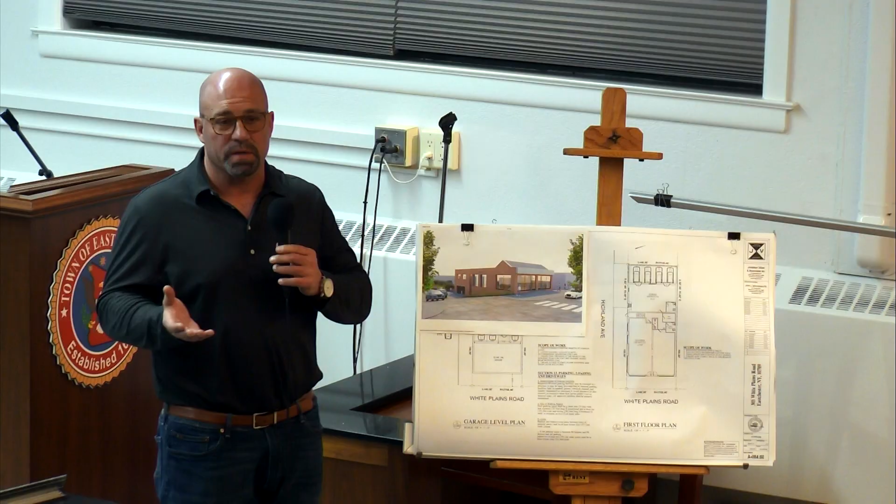Not part of this board, but so you guys did a lower level for parking based on thinking you're gonna get the 2 stories approved? No, because I've explained to him since day one how difficult it is to get these parking variances, so he wanted to improve the parking for his employees in general. So he put as many parking spaces downstairs, whether it's gonna be used just for his office space, or whether we do versions of a proposed 2-story addition or a 1-story addition. It was more for renovation purposes right now, for the 2 offices that'll be upstairs.

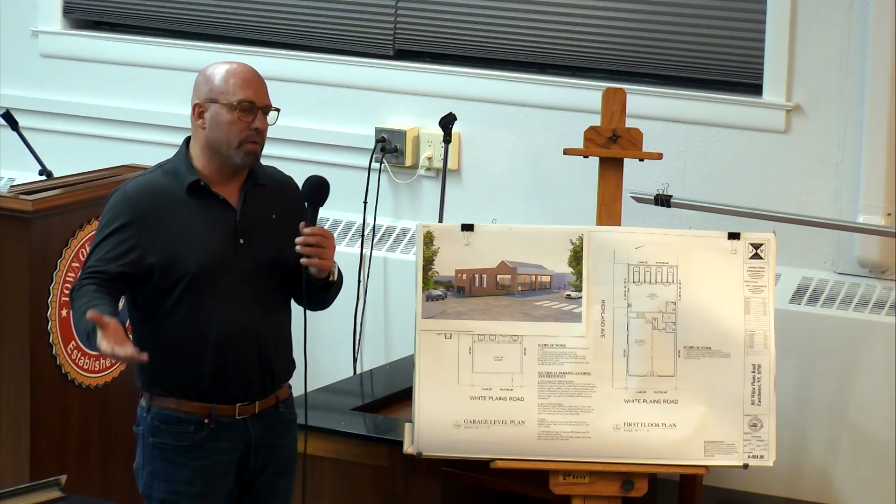So a travel agency and something else? No, he's gonna occupy the whole first floor. It was previously 2 offices, so we're just keeping it 2 offices, but if you look at the plan, we have an opening in the wall for him to occupy it. So it's like 2 modules like the ones that were there before? Correct. And there's a pass-through, right? The door? Yeah. He thinks he's gonna occupy the whole thing, but we never wanted to take the office space away if you ever wanted to separate it and make it two offices. Understood.

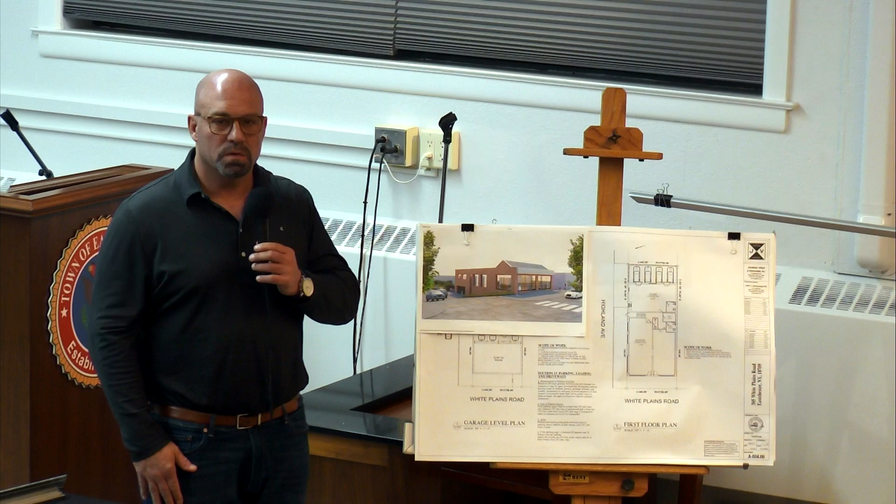Now, you're just gonna match the brick that's there, correct? Yeah. But it has to be new brick, you're not gonna find the same brick. Well, there's veneers that you can get that match that old brick. Do we need to see those samples? That's up to you. It's one brick. What are we exactly approving here? So the changes, fenestration, the side along Highland, the change in the windows, the garage, and then also the rear facade. There should be a rear facade rendering there too.

The only reason why I asked is, well, there's a home right there, and it's hard to match the original rear brick. We already went through a few veneers, but you can. Not only that, it's also a difference in thickness. Yeah, but this whole facade's gonna get done, you can always pack it out to match the elevation of the brick. So here's the rear. I don't like to be difficult, I would just like to see it, just to make sure it matches, because if it doesn't match, you see the difference.

Well, the brick that they have there is not like tumbled brick, it's a brick, but it just has variations in color. So you just have to match, it's not like the solid brick, so it's not that hard to match. What about the roof? Roof is flat, and it has a parapet, so you don't see any material. The existing roof in the front is asphalt shingles right now, it's gonna remain.

Oh, they're not changing the shingles, it remains? No, because this part of the building, this part here, is existing as it is now. The alterations occur from this back here. And there is going to be a modification along Highland because that alley behind the building will kind of be closed off, because now there'll be head-in parking into that.

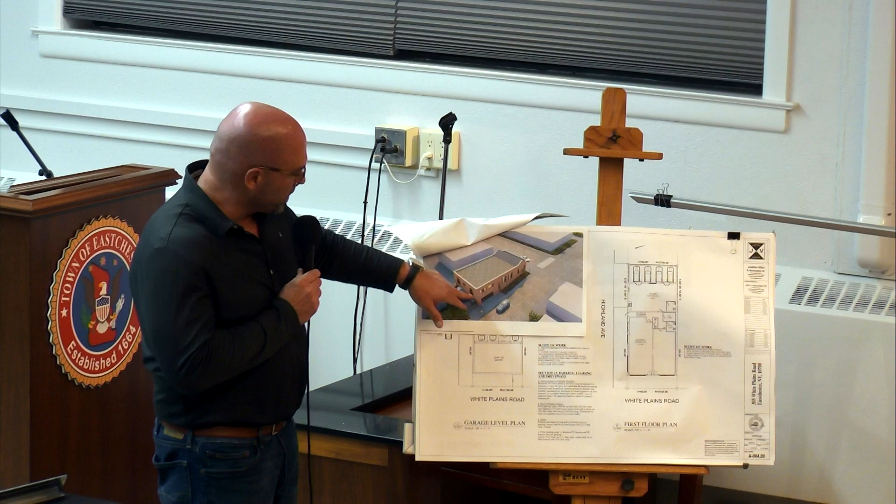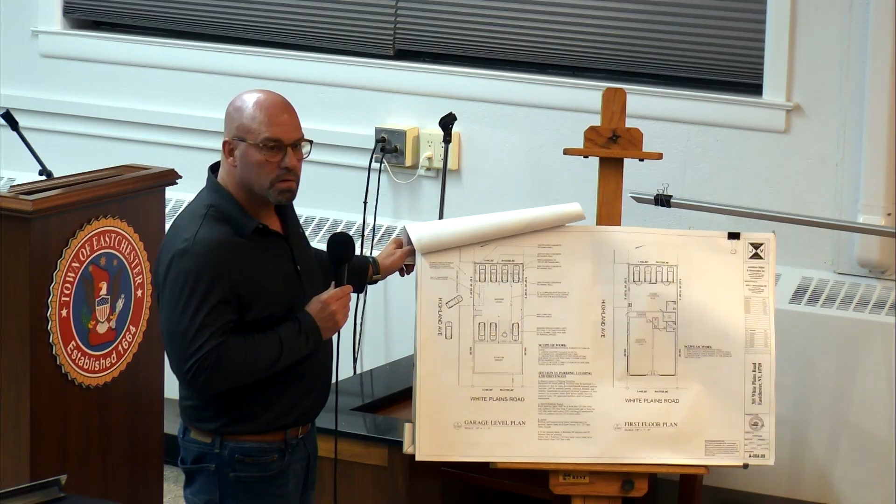So the parking will come in through the stucco side. Yep. So it comes in through Highland Avenue here, and you can turn in here and park, and then that side park. Oh, so it's not the stucco side, it's on the other side. It's over here then, the garage door on Highland Avenue. Where it is now, it's just going to be a wider garage door. It looked all run down. Yeah, that building looked run down. We had to lower the whole garage structure 30 inches.

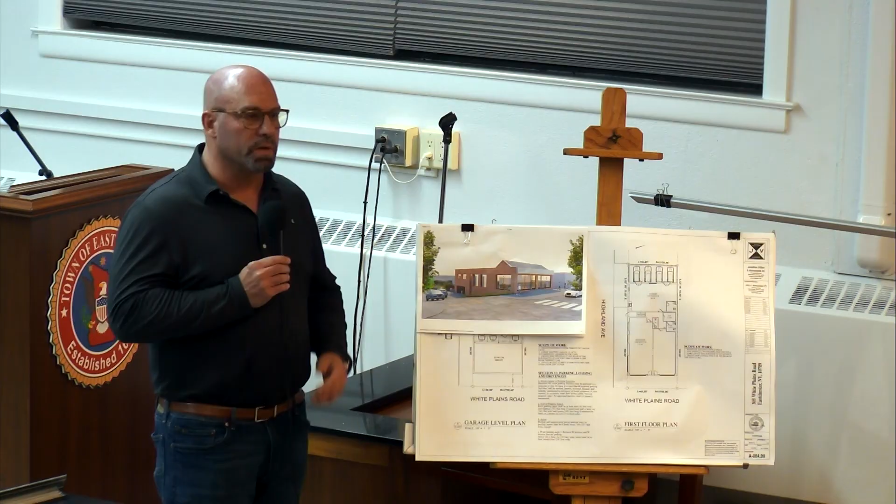And so it was like this before, going into it? It was always, if you look at the rendering, Highland Avenue descends, but if you look at the picture where the cars are in the back, the existing one, that was elevated 30 inches above the curb cut. Oh. So we just lowered everything down to where the curb cut is. It still has a pitch, a few inches higher, but now it's level with the curb cut. So the sidewalk doesn't pitch anymore like that? It'll pitch towards the curb cut, but slightly, not as it was before.

Is there a way where, if we send it to the planning board and it gets approved, to not hold them up, but to see the brick, they could shoot it back to us if it doesn't match? I mean, the planning board could refer it back to you. The other thing you can do is ask the applicant to bring samples and rely on the planning board to confirm that it matches. Yes, I would definitely recommend that. That's fine, not a problem.

To the extent of the amount of work we're doing to this building, he has no problem doing whatever he has to do to match the brick all the way across, so it matches. He doesn't want to make it look different either. So, to bring samples to the planning board to confirm that it matches, and if it doesn't match, refer it back to us. Yeah. To be quite honest with you, the amount of brick we're doing, we want to match that brick, it's a lot of brick.

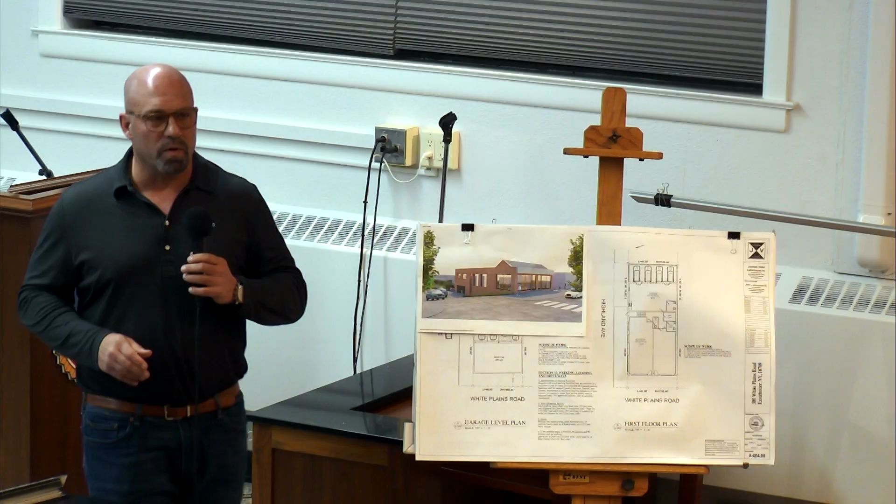Is this a slate roof in the front? It's what's existing now. I believe it's whatever it is, it's slate. I mean, is it slate or asphalt? I think it looks slate. The only place I can really see it is in this corner. There should be an old front photo somewhere? I'm not seeing it. I can show you, I have it on my phone. Hold on one second.

Get rid of the other stuff. Other than that recommendation, I'm good. Yeah, it's slate. It's slate in the front. You see? If you flip it that way. Yeah, it's a nice slate roof. We can keep that, yeah. Might have to repair a couple pieces. And because it doesn't connect to anything else new that's going on, you don't have to do any more roof. No, not visible roof, because any new roof is flat besides that.

And there is a parapet wall, so the mechanical equipment will hide on the roof underneath the parapet wall. So this taller opening is for a stairway? Yeah, that's at the door that's on my drawings. That's an entrance to the building. Oh, before the entrance was in the front. No, there's still gonna be an entrance in the front. There's two entrances here.

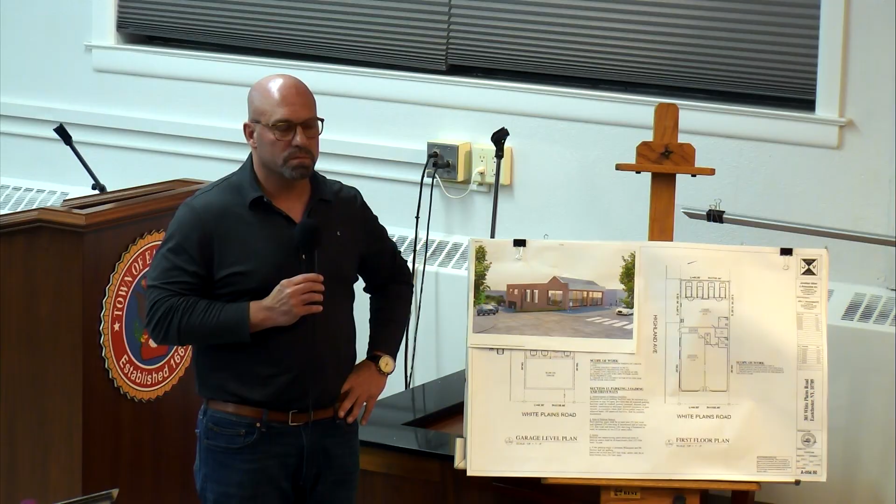I'd like to make a motion to open the public hearing on application 25-39, 305 White Plains Road. I second. All in favor? Aye. Is there anyone here wishing to comment or question anything regarding this application? I don't think so. So then I'd like to make a motion to close the public hearing on application 25-39, 305 White Plains Road. I second. All in favor? Aye. Thank you very much. Wait, no, that was just a public hearing. Oh, I'm sorry.

Okay, so I have two items for this. The first is to remove the signs from the elevations, and I think it's just on the renderings, correct? Right. Remove the signs from the rendering. And number two, provide samples of the existing and proposed brick to the planning board for that board to confirm that they match. Okay. I think I do have a sign on the front elevations. I'll take that off as well. It says awning to be removed or new sign, so just remove that. Yeah, I have to change the elevations to match the renderings anyway. I gotta change it to brick on Highland Avenue. Right, change all that on the plans.

So did you want to make a motion to refer application 25-39, 305 White Plains Road to the planning board with a recommendation to approve with the following recommendations: number one, remove the sign from the elevation and rendering, and number two, provide samples of the existing and proposed bricks to the planning board so that that board can confirm that they match. I'd like to make that motion. I second. All in favor? Aye. All right, thank you.